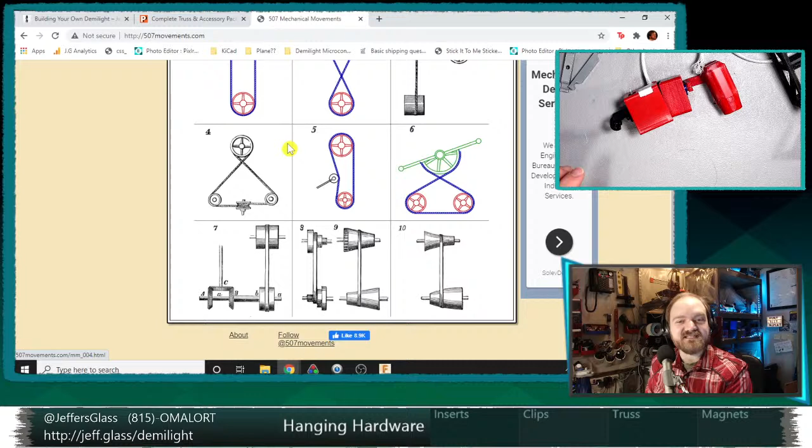Chris says, is it better than the 507? I don't know that it's better. It's dense. So the 507, Mechanical Movements, Mechanisms, and Devices. Let's see if we can get inside that one. That one has a nice sort of web version.

So one thing I do like, let's see if these ones have the same. Yeah, it's very similar in feel to this. This is at 507movements.com. You get things like it starts to spark your imagination. I'm not even sure what you would use this for, but you're translating presumably two non-concentric axes of motion while doing a sort of gear reduction between them. It's like, ooh, that's kind of fun. So fun things if you're like, oh, I need some brain juice, I need to noodle around a little bit.

So yeah, it's not really necessarily informational as a reference. I find it just exciting to be like, oh yeah, okay, linkages with gears on them and an arm and a piston and yeah, it's just a funky thing to do.

Let's get into CAD and start figuring some stuff out. Like I said, I don't know that CAD is going to be the best place to work these things out, but it's at least a place to start.

And I'm not going to take us into the full Demilight model to start with either, just because the timeline is so long and so messy that I think it's going to slow the computer down enough, especially trying to do it on stream, that we'll just start from sort of a scratch plate and see where that takes us. Did we do a night talking about Fusion back in December, I feel like?

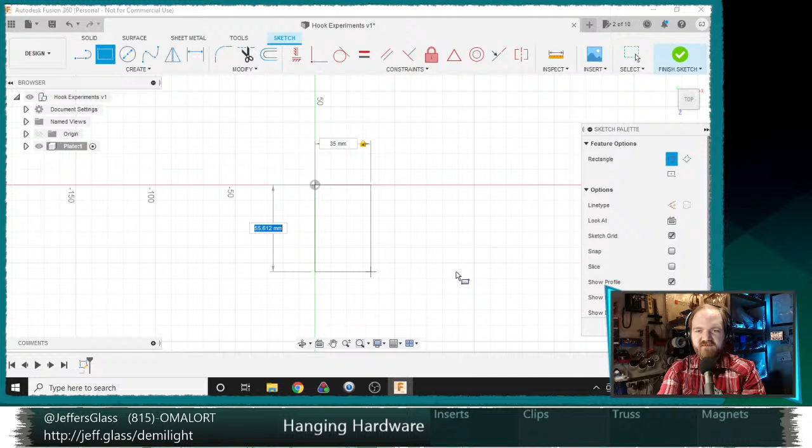Let's say it's 2 millimeters. Like I say, we'll go back and make this precise to the actual model at some point. I just need to get some experiments out, because if we're gonna ultimately learn that they don't work, then why spend a bunch of time on them? So we'll make a new component for our, we'll call this hook 1. That's a name that's not gonna come back and bite me at all.

So here's what I'm imagining. I'm imagining a device shaped like, let's see, how am I going to best demonstrate this? How about a piece of solder? Just need a flexible bit of something to work with here. So why not a piece of lead?

So I'm imagining a hook shape something like this internally, and this, not to scale, represents the outer part of the hook. This is sort of more rectilinear, like that.

So there would be a slot in the base of the light itself through which this arm can go, and it goes down pretty far. This hook part clears the bottom. Then this hook would rotate over to the desired angle, and then it would hook sort of back up into a hole or post or something like that. That would allow it to stay in a given one of 4 orientations.

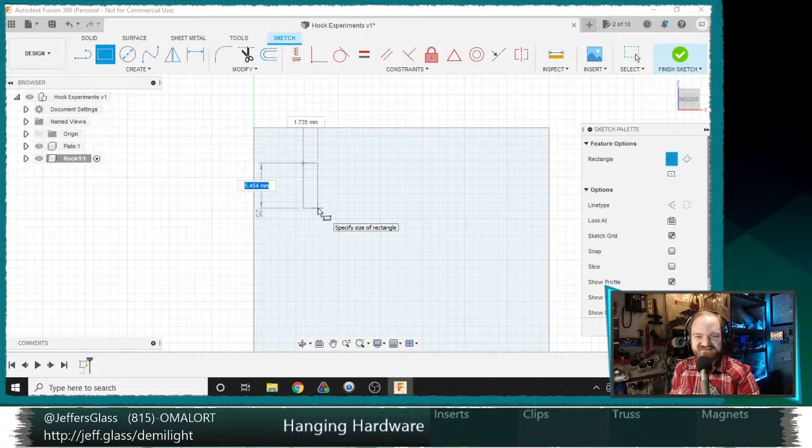So let's start with a sketch on our bottom face here. This may not be to scale ultimately, but let's say that we have a 6 millimeter by 2.4. How wide are these that we have on the table here?

Grab my calipers. So these existing hooks are 10 millimeters across. That feels about right. Could maybe be a little bit smaller. I think for this purpose, it's actually going to need to be a little bit smaller.

So why don't we make these 8 millimeters across by 10 millimeters? Gosh, that's going to be huge. I guess the arm doesn't have to be the same width as the hook itself. That would be quite handy. So let's say that these are in fact 4 millimeters by 8 millimeters.

And if this is not making sense, I apologize. I think it will once I can get it into motion. Oops, where's my sketch? There we go. So we'll draw a line up from here.

And then what I want is a circle through 3 points. And they are this, and let's say that. And there we go. Okay, so this is going to be the first body of our hook arm, as it were.

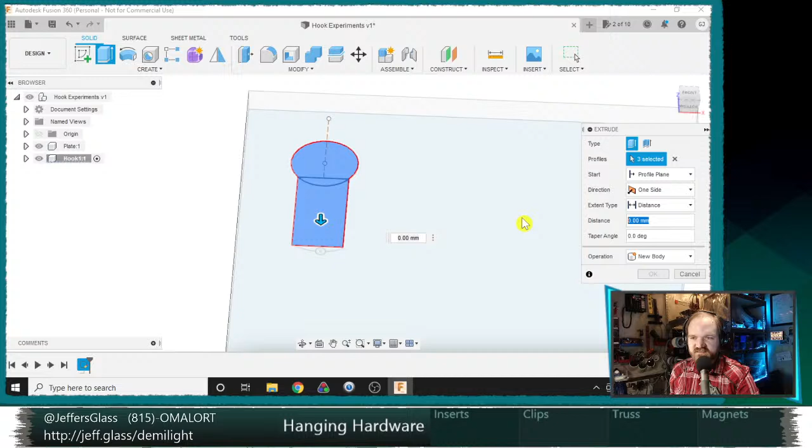Let's say that's 2 millimeters, sort of hanging down inside of the body of the light, as it were.

And you know what I do? I think what I want to do, right off the bat, one is I could move this to some more cromulent position. Ooh, Francesco's sent me a little loading symbol.

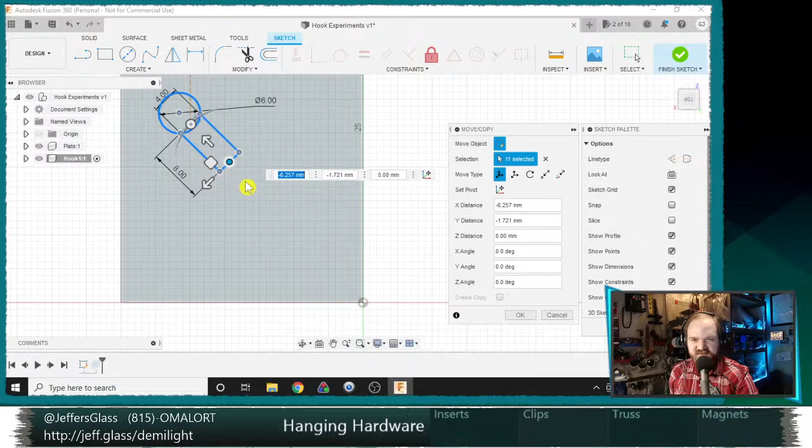Let's see, should probably put this on something like a center line, but just as a sketch of a thing, I think that'll be fine. Okay, so that's fine. That extrudes.

Okay, so then this thing, in my imagination, which is the only place it exists right now, is going to have a little tooth that sits back up into the body of the light.

So we will draw a little line there, and let's say that this is 3 millimeters, and we will extrude it, say 1.2 millimeters up. Okay, so there's that.

I'm not, so ultimately, right now these two bodies are intersecting, right? This arm and this plate, which is representing the bottom of the well—I guess I'm confusing bottom and top quite a bit here, but calling this the bottom surface of the light makes sense to me. So right now these two bodies are intersecting, but I'm actually not going to fix that yet.

We'll come back and fix that a little bit later. We'll just cut away a lot of this bottom at the same time. So now let's make the upper part of the hook.

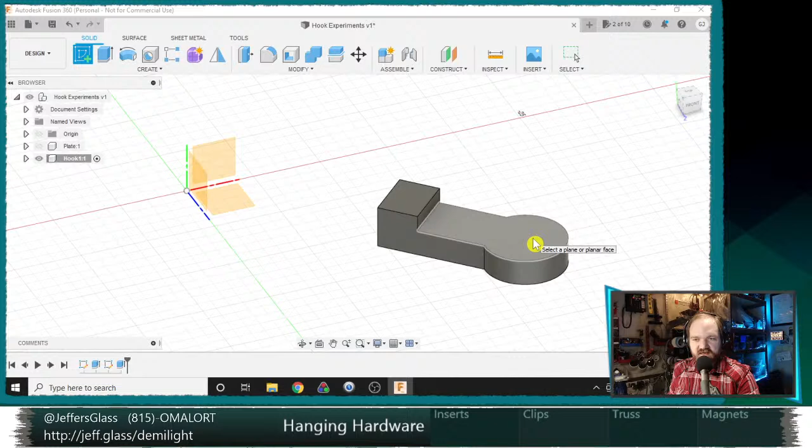And to do that, I am going to take my circle here, make it an actual circle on this layer, and extrude that as a cylinder just a little bit, about 0.4 millimeters above the bottom surface of my Demilight.

We'll say to object. I feel like, and I wouldn't blame anyone, all these words that I'm saying only like 70% make sense when I say them, so forgive me. I'm feeling like, well, what I hope Jeff's talking about makes sense at some point. I hope so too, dear viewer.

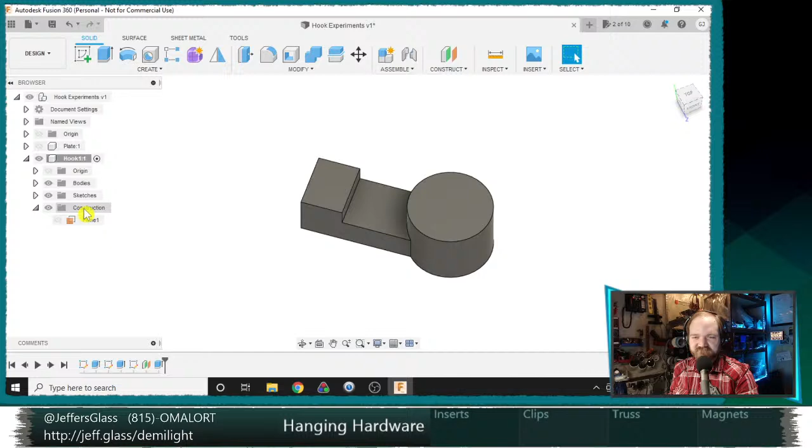So now we would create the actual part of the hook itself. What might be classy is to not make a sketch right on this layer. We'll make an offset plane, say 5 millimeters above it, and start the rectangular portion of the hook there, and then we'll loft between those two shapes. That'll make a nice smooth transition. Won't that be classy?

So here, what we will do is make a sketch line just there, and we will start making the actual sort of arc of our hook. We said our hook was 10 millimeters wide, and that felt about right. So this will be 5 millimeters, and thickness-wise, let's say it's going to be 3 millimeters total.

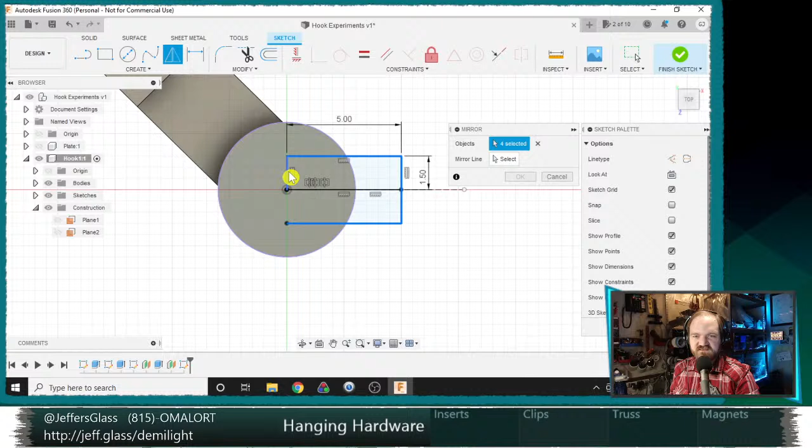And then we'll just take these lines and mirror them. This is one of my favorite techniques when I'm drafting a symmetrical thing, is just to make 1/4 of it, and then mirror it across the relevant dimensions. So we get, oops, not that, I want to use that as my mirror line. So now we have a rectangle that is exactly centered on this circle.

Now let's steal some more dimensions from this, assuming that we're mimicking this existing hook exactly, which, as we talked about earlier, is not necessarily the goal, but as a place to start to work out the attachment mechanism, I think is a decent place to start. So that is about 16 millimeters there. That's been feeling about right.

So what I will do is extrude this 11 millimeters, because we already have our 5 millimeters down here. And then, let's see if I get this right. I want to loft between this profile and that profile. And I should get a nice smoothly varying shape between those two. That's going to become our interface point.

And now we'll make the rest of our hook here. So we'll make a sketch on this side, and we will create a couple of circles in line with our sort of vertical arm of our hook here.

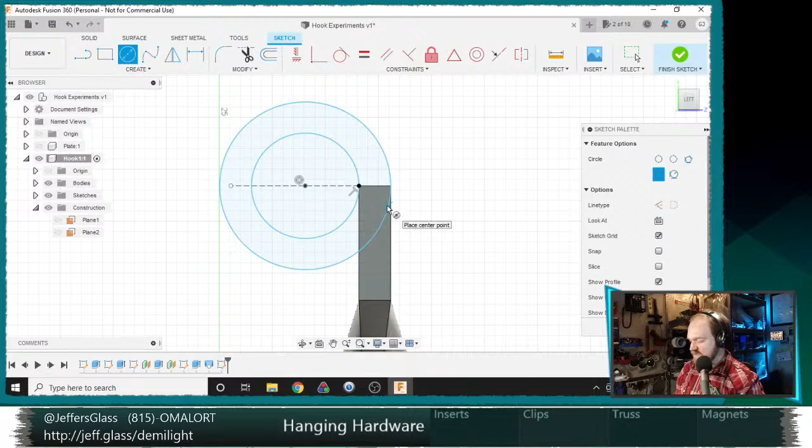Let me steal a couple of quick dimensions for them. I think I made the inner dimension here arbitrarily about 1/4 of an inch, maybe a little bit bigger. 7.8 millimeters there. And I guess what was total thickness on this? About 3 millimeters, okay, that's pretty good. 0.78 millimeters.

So, coming back over here, we will say that if we put a point across here, put a point and a point, and we will say that this is 0.78 millimeters. Oops, not 0.78, 7.8 millimeters is what I should have said. It's a very small bit of truss there.

And then it's just we won't cut it off perfectly horizontal. We'll make this extra line here so we have a little bit of sort of overhang on our hook. And maybe we want to give that a dimension just so it's well defined. Let's say that's 10 degrees. We may want to come back and finish that later.

We'll make an offset plane on the other side of our hook, and then we'll extrude this profile that we made straight across to there. Okay, so there's the basis of what I'm proposing for our new hook.

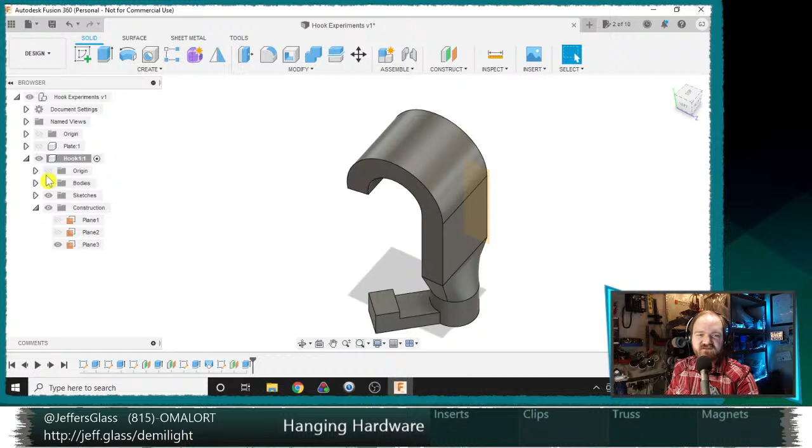Now let's deal with how it would actually interface with the base of the thing, right? Because right now these two things are sitting inside of each other, so to speak, because there's no interface between them.

So first things first, let's just do a basic cut. We'll use the combine operation on the body. We'll use our hook as our tool body, and we'll do a cut, and we'll keep the tool so we don't delete our hook after this operation. Let's see here, did that take? If I turn this off, yes. So now we have a hole and a notch, so to speak, in our base here.

And now I wonder if I could turn this into 4 notches. There's a couple ways to do this, but I'm going to take the lazy way out, just like before. I spend a lot of my time making 2 sets of axes and mirroring across one axis, then the other, to get 4 radially symmetrical points. I guess I could do a rotational pattern instead, which would be slightly faster in Fusion, but this workflow is very familiar to me by now.

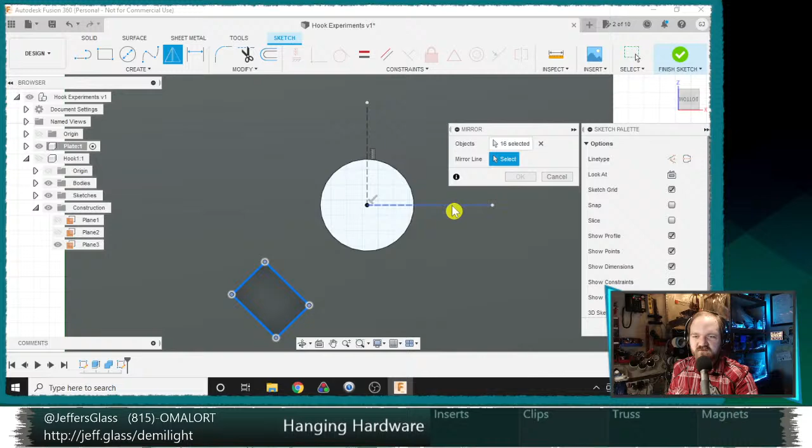So I select those 2 notches, mirror them across. These 2 notches, mirror them across, and now I want to make these other 3 notches the same depth as this first notch.

Let's see, is that the right place? No, that's on the surface here. We'll turn our sketches off for a second. I want to make a notch as deep as this hole here, although it's not letting me get into that hole. Maybe the sketches are... there we go. I want to make a plane coplanar with the inner point of this notch, and then cut the other 3 notches to that plane.

And hopefully... ooh, well, that's not right. We'll try it again. Take those 3 profiles, we'll do an extrude cut to the distance of that plane. Yeah, okay, so now I have my 4 registration points there.

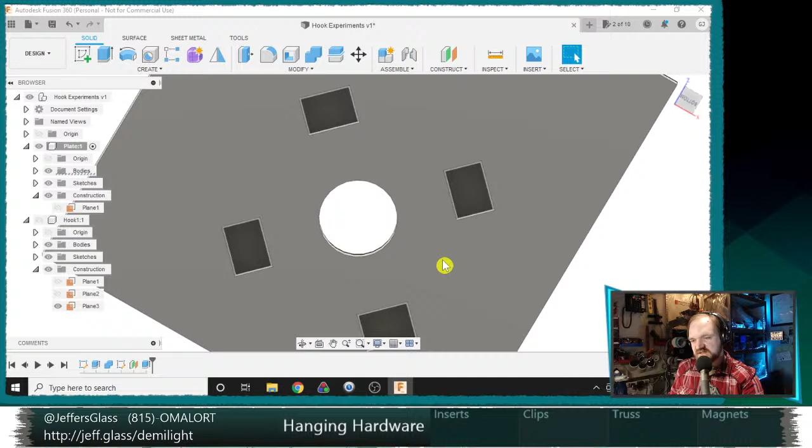Why cut to the plane, not just to the face? At least in previous versions of Fusion, maybe this is no longer true. Let's find out. Deselect that object, can I just cut to... oh, you totally can. So in previous versions of Fusion, there were times it wouldn't recognize how deep you were meaning to cut, because it's a little ambiguous.

If this was, for example, a non-planar surface, you could still specify cutting to that position. But if the surface itself doesn't extend as far over as you'd want to go, you get this error like 'could not create tool bodies'. It's like it doesn't know if your position is meant to be coplanar with this point or that point, or that curve, or if you're supposed to extrapolate the curve. I guess at least in the current version of Fusion, you can just use a face as the cut surface. I guess it's now an out-of-date habit to create a zero offset plane there, but that's good to know.

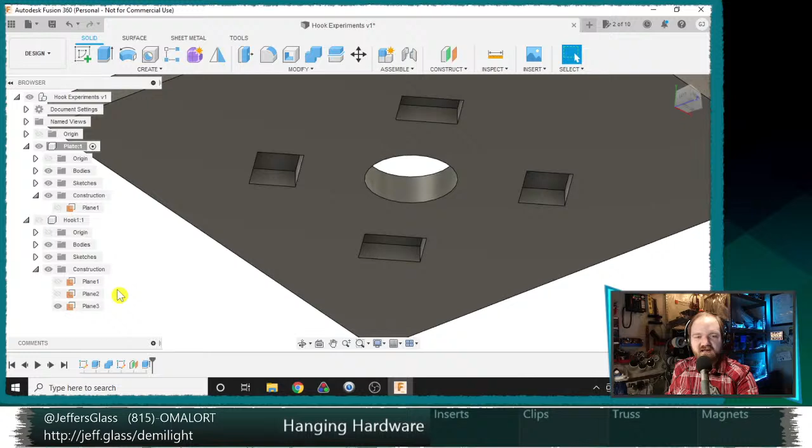So the last step here, turn our hook back on, is we'll need a way to get this hook down into this base. So I am going to create one more sketch on the base of my plate, and project the profile of my arm here, and then take those various parts, not this corner and not that corner, and make a copy of them, but rotated.

Let's see, ooh, is it not going to let me move-copy a projected point? Ah, that's a bummer. We may have to go over them, which is a bit silly, but we'll do a 3-point rectangle tool, which is a great way to get rectangles on non-perpendicular axes. And we'll take our circle and the relevant lines of our rectangle and rotate them by, say, 45 degrees.

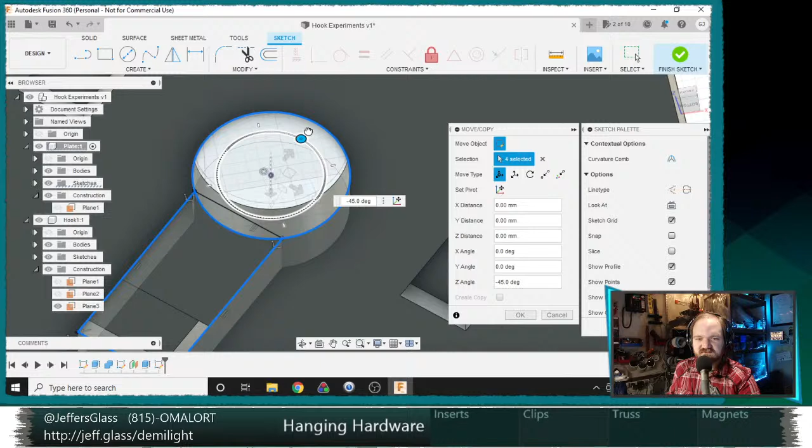Will you let me do that? You let me do that? Not so much, huh? Maybe it's because they have constraints, constrained to be immediately on top of the shapes they're based on. That would make some sense. Let's see here, yeah, I think that is what's happening. So maybe this isn't quite the best way to do this.

We'll project that shape in, copy and rotate. So let's see here. Copy, take that point out. Oops, take that point out. Copy. What I don't think it's letting me do, Chris, and I might just... oops... is... oh, it is letting me move them now. That's a good sign. Let's see here. Ah yes, because I just copy-pasted it, it didn't bring the constraints along with it. That's quite clever.

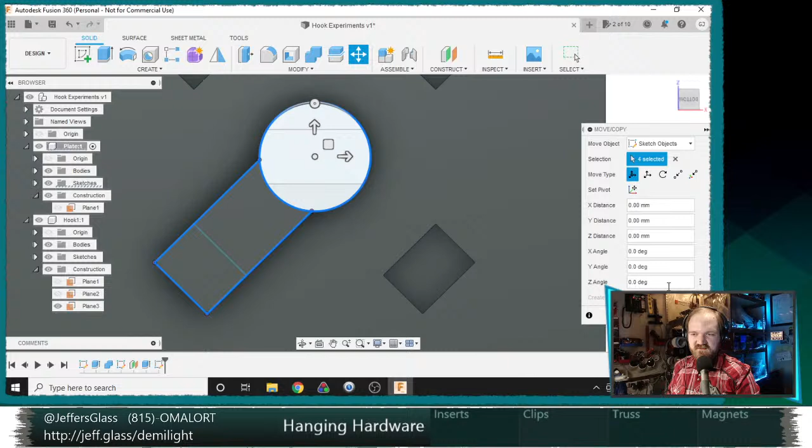Let's see, is that just the circle again? I want sketch objects - I want this circle, that line, and that line, and I want them to rotate. There we go, yes excellent. Thanks, Chris, saving my bacon tonight. Now we'll finish that, and we will extrude.

I think I need one more line to this sketch. Why is this not a region? Maybe we will draw from the circle to that point. Oh, maybe we are seeing some other body. Yes, the hook is getting in our way, so get rid of that hook. And now we should be able to extrude, cut, to object, all the way to the top, cut, and there we go.

So now, all of you who've been waiting patiently for me to figure out what's going on - there's one more thing I have to do, which is adjust some dimensions on this hook. Specifically this construction plane needs to be as tall as that lower notch is, plus a little bit. Let's do 1.6.

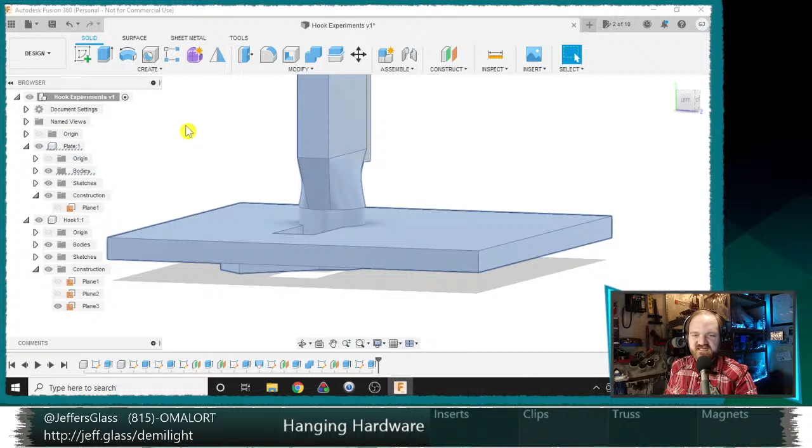Okay, we got there through a bunch of rambling. So here's the gist of this idea: you take this hook part, you rotate it 45 degrees to where it is now. It goes down through this keyhole slot underneath. It rotates around to one of these four positions, and then it pulls back up slightly into one of those four slots. There it is sort of not anchored, but its orientation is captive in that position, right? So it would lock itself to one of those 45-degree positions.

Now, obviously, there's no clearances built into this yet, which would be the next thing to solve, but I think this has some merit. Let us do a thing I often do in these situations just to see if it's worth trying.

I'm just going to open Prusa Slicer and see how long it would take to print something like this, to see if we can run off a test copy tonight while we work on other things, and then come back to it - maybe working on other ideas for the same project.

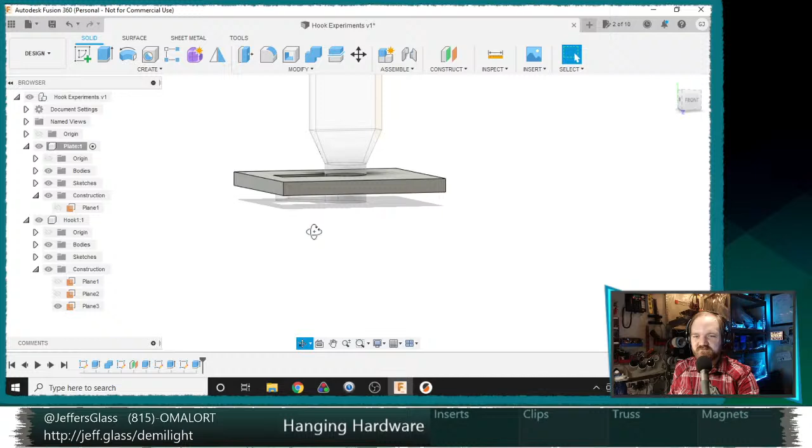And just because I'm feeling lazy, rather than going back and editing the original size, I'm just going to manually cut away the extraneous parts here. So we are left just with the active bit. So let's export these as STLs, and as Chris is rightfully saying, I have to come back to do clearances before it prints. But this is something I do.

I'll just be like, hey, if I wanted to throw one of these on, it's a 12-minute print - well, I'll just get it going while I work on more things. Save this in my moving lights folder.

You don't send it directly to the Prusa printer? No, I like to have a separate copy of all of the STLs that I print, as well as all of the exported G code I save for every print that I do.

So this is plate 1. And I will confess, I rarely need that, but there are times when knowing that I have the exact STL, or especially the G code, that I printed on a specific date and time can be really helpful when I'm going back and trying to iterate on it. So no, I don't send it just directly over to the printer in that way.

So let's bring our hook and plate in here. And now I guess another problem is thinking about print orientation for these. Let's flip this guy on its side. That's not awful. With supports, that would print just fine.

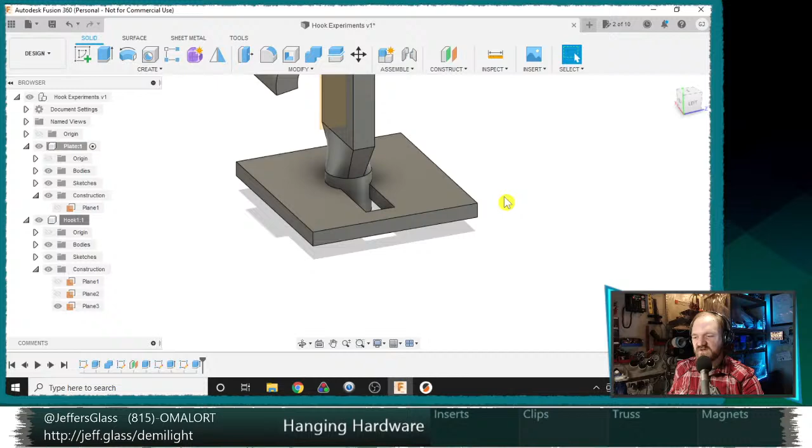So let's go back in - Chris had 35 minutes. Chris, you were so close. We'll go back in and clean up some of these clearances, and then we'll get this thing printing out.

So let's see here - we did, let's go back into our sketch where we made our notches, and rather than just having them be exactly the size of the tab on our hook, we'll make them just a little bit larger. I'm gonna guess we need 0.4 millimeters of clearance overall, so I'm gonna add 0.2 millimeters on all sides. It's a little bit of a guess.

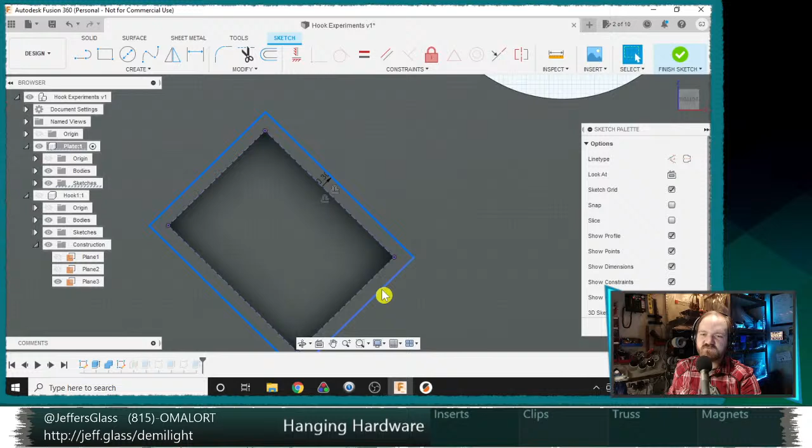In fact, maybe for testing purposes, let's go a little overboard. Let's give ourselves 0.6 millimeters to play with. It'll probably mean a little bit of shakiness in this arrangement, but that's for the sake of validating this slot idea, rather than not being able to get the thing in and not being able to validate anything.

I think having it go in and being a little sloppy is probably preferred in this case, versus not being able to get it in the hole and not knowing if the idea works. We'll mirror that across.

All right, we'll finish that. This is one thing we talked about with doing Fusion work: rather than going from the end of my timeline and making changes, I'm going back to the earlier steps in my timeline and making the modifications I should have made at that point.

Similarly here for this keyhole, I am going to apply some tolerance to both the hole itself and to my slot, and then make sure we cut both of those out.

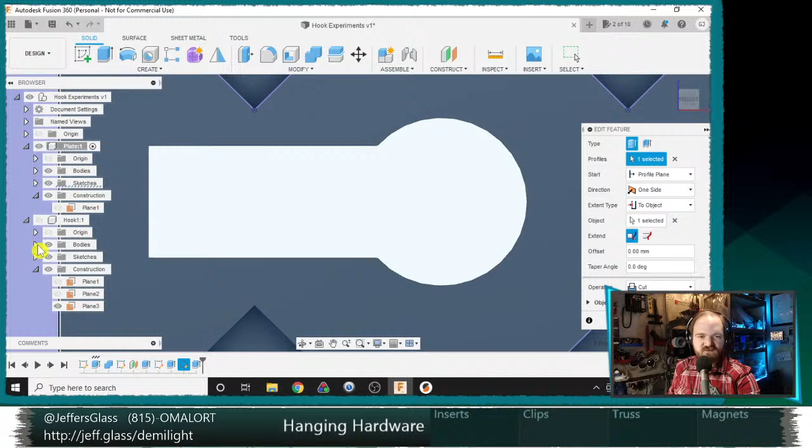Now where is the sketch I actually want to cut? That's not the right one. It's this one, yes. So we'll include this additional area here so we have a nice bit of clearance.

It says I missed the bottom left one. Thank you, Chris, let me go back and get that — the bottom left notch, I'm thinking you mean. That would be this. Yes, excellent, thank you.

All right, so that's some clearance on the hole and the keyhole there, and I think those are the only places we need clearance, because that's the only places they interact.

So, another neat feature — I guess I've never played with how this interacts with the send-straight-to-3D-printing utility method in Fusion Works.

I'm just going to re-export my plate object here as an STL, and it says it already exists — do you want to replace it? Yes, I do, please. I'll do the same for my hook, saving it under the same name.

Then in Prusa Slicer I can come in and say reload from disk, and it will open the newer version in the slicer. If you send it again, I wonder — yeah, all right, well that's good to know, Chris. That's how it should work for sure.

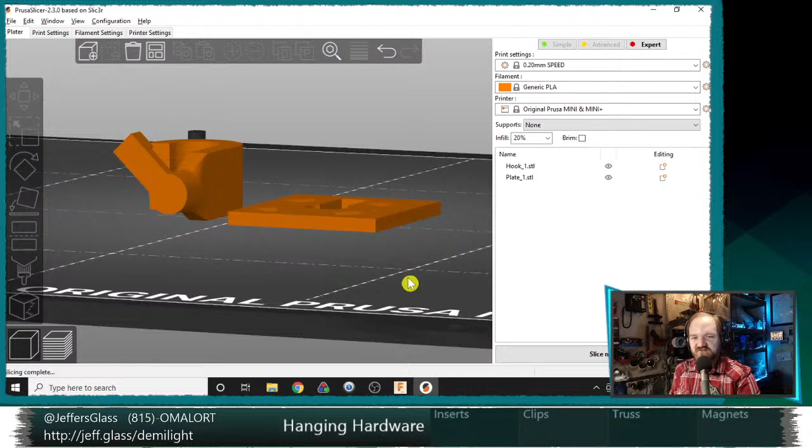I guess we'll want to make sure we've enabled supports — generate supports, please. All right, now let's slice. Slice now: 22 minutes with supports on. That seems reasonable. Well, let's give it a shot.

So I'm going to export this G-code. Like I say, I save all of the G-code for all of my prints, so I can sometimes go back and check what settings or temperatures I printed something on. I don't have to do that often, but when I need to, it's very handy.

So we're gonna find out. I suspect y'all won't be able to hear me super well while I'm monkeying around with the printer here, but hang on for a moment — enjoy some cool jams, and questions if you got them.

Oh, I never said tonight — my beverage of choice is a Sierra Nevada Wild Little Thing, a slightly sour ale. Now, I am not a sour ale guy, but this one is only slightly sour, and I find it quite good. The other advantage of the in-my-face microphone is I don't have to mute myself to drink — I can just slide away from it. Very convenient. I guess I could smack my lips on the mic too, that would be nice.

We'll see if I have enough headset cord length to do everything I need to do up here. I think I will.

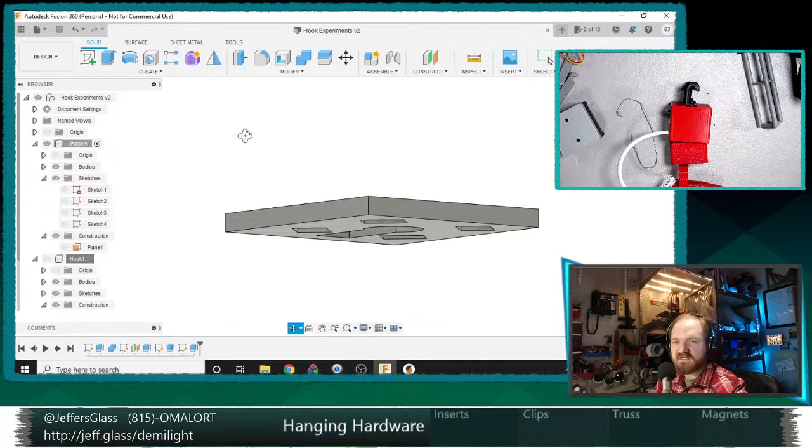So that's exciting, that's one draft, going to the printer now. That's great progress for, I don't know, 20 minutes of drafting tops. That's the idea that's been kicking around my head for a while, and I had to get it out so we can play with it and see why it's not good.

So thinking about the other piece of inspiration for connectors this week, for how to connect two bodies together, is... where is it? It's just here. Hang on.

No camera on the printer. Yeah, I certainly could, Chris. Actually, if you looked really closely behind me, you could maybe tell. That screen just there is one of the additions to the workshop this week, showing the Prusa Connect interface, the little web interface served by the printer itself. We're going to have to use the computer to do it, but if we had a second computer, or that Raspberry Pi setup from the Raspberry Pi Nights, we could just keep track of the print time on that.

It's .0.119, I think it is. Yeah, so if we send it to its IP address, we just get that same little local interface here, and it should give us estimated print time. So we can actually just check back in with this every once in a while if we feel like it. And like I say, that's what I have on the TV behind me there.

Sidebar about this TV: this was a free TV, got it from the neighborhood, like don't throw anything away, we'll give it to a good home organization, which is great. Have it hooked up to a little Raspberry Pi. It's fine, it's a 1366 by 768 native resolution TV. It's fairly old, it's cool. It has HDMI, VGA, composite, component, and a tuner input, like an RF input for an antenna, so there's a lot of fun playing around with it there. 1366 by 768 is not super kind to Raspberry Pis, this is not the first time I've run into that. Currently, though the Pi is happy to put out data over its HDMI port, the TV, no matter what setting I'm putting it, is interpreting it as a 640 by 480 data stream and then upscaling it. So it's very low resolution. I'm sure you can't tell over stream and the internet and everything, but that is very, very strange.

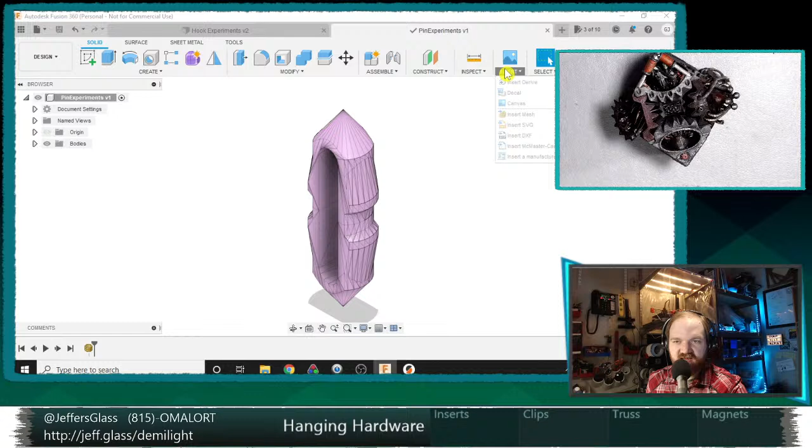They're coming in as meshes, but that'll be fine if we're just taking measurements off them, just to kind of examine how this person did this design, and how much lip is there on one of these holes versus how much spacing is in here. Because to be perfectly honest, if I was going to start something like this, the first thing I would do is just rip off this design wholesale and copy these dimensions over, because I think they have some possibility.

Now, here's an interesting thought. Could we combine these two ideas? This peg design is meant so the pieces can rotate 360 degrees within a circular shell, or in some cases they're locked into exactly one orientation. As we saw, if the hole is the same shape as the pin, then the pin itself is not going to rotate.

In these corner pieces, that's actually what keeps the center sections static in relation to the core, while this top piece rotates around them using that pin as an axis. But that center piece down there, that little ball, is not actually moving. It's the same on all four of these - this little mechanism in here isn't actually moving relative to the center. This is just rotating around it.

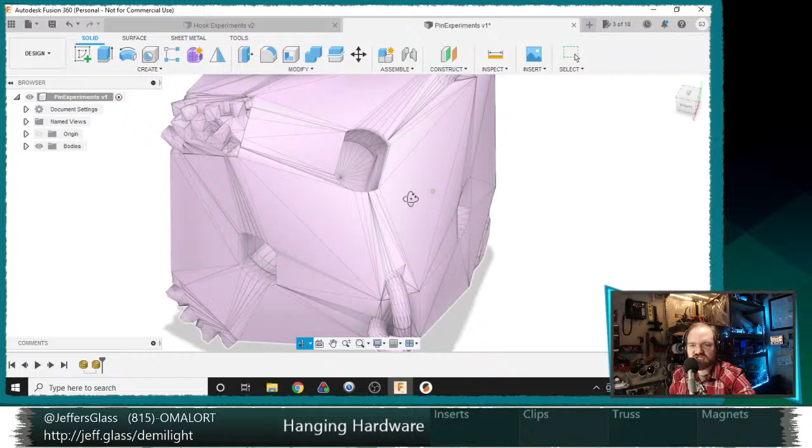I guess the other thing we could do is, rather than having this be a circular hole, it could be, if we go back to the computer, let's say two holes this shape at 90-degree angles. So you could put your pin in this orientation, or 90 degrees to it. If we imagine this is sort of a cross-shaped hole, it could go in that orientation, but it couldn't slide between the two without pulling the pin out and putting it back in.

That's kind of interesting. That sort of minimizes the clunkiness of the hook itself, which I rather like. Yeah, that's kind of interesting.

Let's see if we can get this idea tested out. One thing I'm going to do is steal this exact pin design, and by tomorrow I'll have the link to this actual project in the video description, just because I'm going to rip it off, and it's really quite a cool solution to this problem.

So to do that, let's get back into CAD here. I guess before I do, just a real quick note for those who have been here before.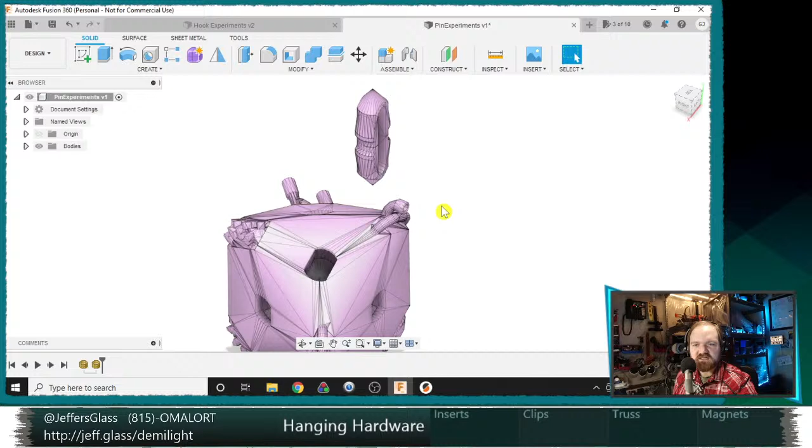All right, so let's get in here. Maybe we can just turn this part into a hook.

Let's do this properly, let's get rid of those. We'll do this inside of components. We'll call this our hook. Need some servos and face tracking.

Chris, if there's one thing I'm learning from this week, it's that I definitely don't have enough projects. So I think I'll get right on that.

So here is our pin as a mesh. Let's see here, I'd like to construct a plane through two edges. I might need to take this mesh and turn it into a different kind of surface here.

If I can remember, here we go - surface. Let's see. Rigid joints, contact sets, modify, construct, plane through two edges. Will you let me do this in mesh space? Maybe not.

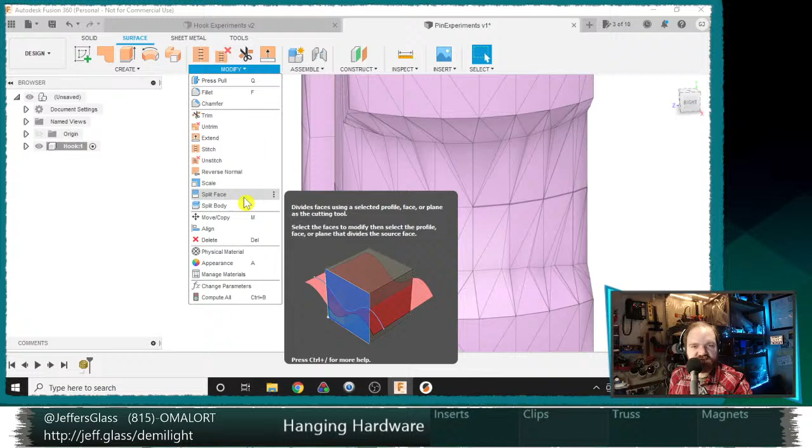Let's see, untrim, unsplit, split body - yeah, it's not going to let me work with this. I have to convert this to a different kind of mesh, and to be perfectly candid, I don't remember where that tool exists now. Let's see here, it used to be... oh, maybe it's here now.

Bodies, mesh body, create components from bodies? That's not quite what I want. Used to be a convert to object or something like that. Where did that exist?

Press, pull, assemble, motion link, no. Let's see here, what am I thinking of? Is it under tools? 3D print, make, utilities, inspect, select is what I get. Component color cycling toggle - well, that's exciting. It used to be in what was called the patch workspace, but the patch workspace is like 3 versions gone.

Let's see here, mesh to B-rep - yes, Thomas, that's what I'm thinking of. Where is mesh to B-rep now? Enable our mesh workspace preview in preferences to try a new mesh editing workspace. Oh yes, you have to disable the timeline - that's right, this does ring a bell.

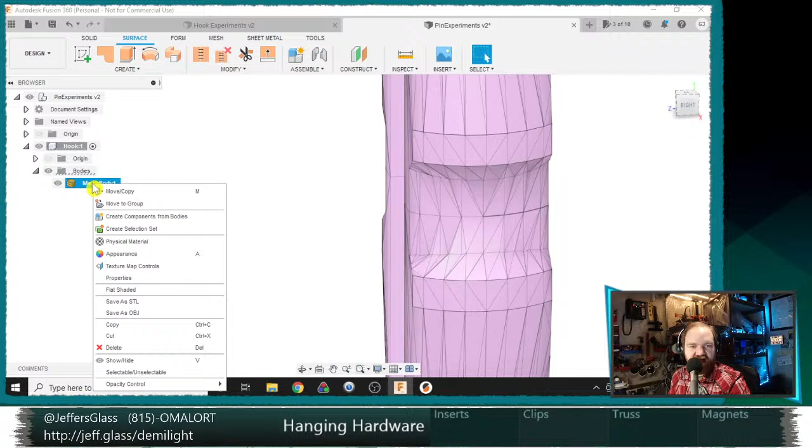Let's see here, convert, yes - convert quad mesh to T-splines, B-rep to T-splines to B-rep. No, that's not quite it. Mesh to B-rep - Thomas, my hero. There we go. All right, so now let's re-enable our timeline.

I guess I might be a little bit screwed. I'll do the plate that will mount this in as a separate assembly, so we don't get screwed by having to disable the timeline again. Let's see, so now we'll go into pin experiments, capture design history. There we go, yeah, there we go.

So now hopefully I can do plane through 2 edges and cut this thing in half. Yes - go back into our solids workspace, split body, that body with this tool, split. All right, so now, yeah, there we go. And now I've got half a pin to play with.

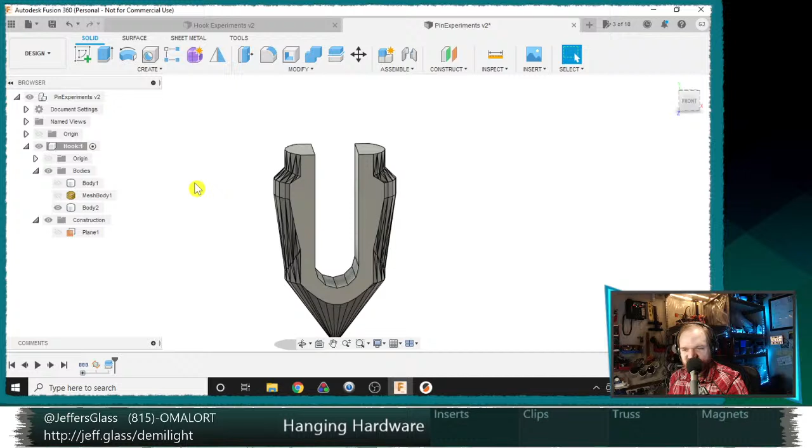I guess one thing we'll learn is if this is the appropriate amount of clearance here to fit snugly inside of our hole. But I think there's no real way to know without trying, so let's just make our hook.

So we'll make a new sketch on this face. We'll make a rectangle here - that's going to sort of be the plate that interfaces with the bottom of our Demilight. And then we shall, let's, find our midpoint here.

How do I do this? I guess I will. You know what, I'm not even going to be that fancy about it. I'm just going to mirror this across our center line and call it a day. Mirror. There we go.

Finish. I should probably think about printability here. So probably this hook only wants to be as wide as the actual pin itself, right? So we'll make this collinear to that. Oops, if it'll let me.

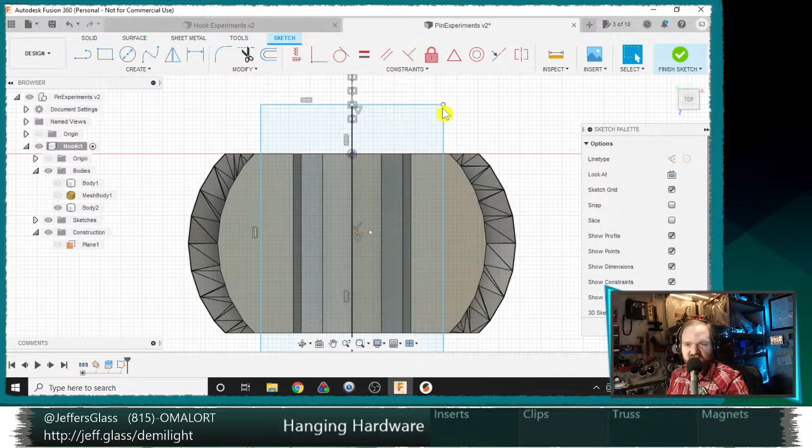Maybe coincident will be happier. Coincident to that? No, not happy about that at all. Maybe, here, let's try projecting both of our faces. And then let's try collinear again. Collinear. Oops, failed to solve.

How strange. It's not quite happy playing nicely with this B-rep here. But that'll be okay. I think we just need to get within 0.1 millimeters for our slicer to be happy, and I'm just going to do it by hand. Because like I said, this is just an experiment for experiment's sake.

So now let's see, how wide is this turning out to be currently? This is... almost exactly 10 millimeters, which is what our original hooks were, that's kind of handy. So now we'll extrude our various surfaces upward by our 16 millimeter height.

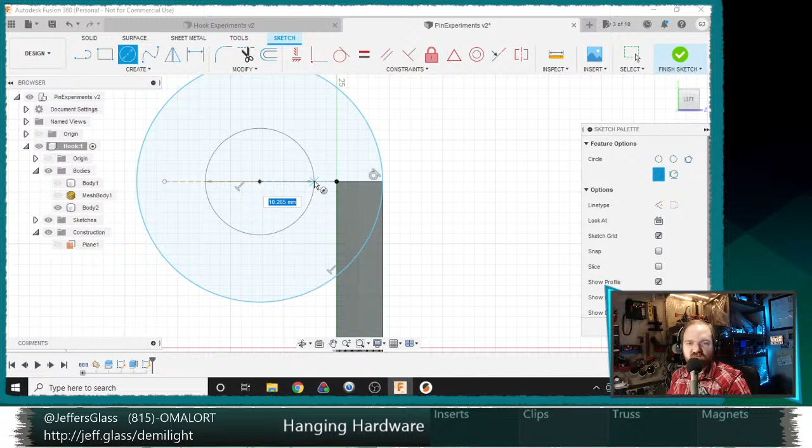Not that the hook is necessarily the perfect shape. In fact, there's good reason to think that it's not. But just for the sake of consistent testing for now, it seems fine to replicate that same hook shape with all of our pin experiments. So let's see here.

I need a point on this side, and we said this distance was what? That distance was rough. Turn the calipers on - they work better that way. 7.8 millimeters. All right, so 7.8.

Oops, that is 7.8. No, not 7.8, Fusion? Not at all 7.8? It doesn't want me to change this dimension. There we go. Something seems off here. Something seems... not. What's feeling strange? Maybe, maybe not. 7.8 on the inner dimension. Yeah, that seems right. Okay.

Well, that's fine, I guess the hook itself is thicker in cross section. Oops. And I was going to, much like our other one, we will have a slight overhang here at a 10-degree angle. And then we will extrude, join. Okay, so there is our pin hook, which is kind of interesting.

Now, I wonder with this one - I'm actually going to take away that overhang, because I think without it, this is quite printable, and with that overhang, it's not going to be as much without supports. We'll just do one of those for now. So that's our potential hook.

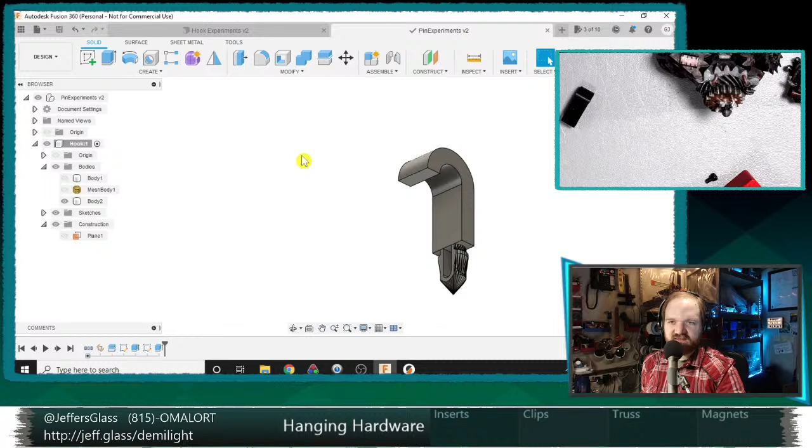So let's work on the hole that would go along with this guy. We'll do it as a new assembly, since thanks to Thomas.

Oh, what does Thomas say? Thomas says, really wish you didn't have to turn off design to convert like that, but at least it works and Fusion has gotten better. Yeah, it's true. Like, I remember back in the early days of Fusion, the STL import function was basically unusable. And now it seems like, other than me not remembering how it works, it seems to work okay.

Ooh, Cookie says, here's a good aside. Cookie says, I just realized you can use existing hardware to make a raised center pipe. Check Twitter for the pic.

Ooh, I like this. All right, well let me, on yet another monitor here, I'm just going to whip up Twitter. And, ooh, check this out, y'all.

Yeah, so this is Cookie's par pipe adapter, right? Something like that. If you print the par standard STL, you can use 2 grapples to get an internal pipe like Tyler Truss. Yeah, so if you were doing like either a moving light tucked up inside the truss here, or like sticking the par 64s inside the truss or what have you, that's a really cool repurpose of that existing design.

It looks like Cookie - and you tell me if I'm wrong - there's a wing nut in the back, so it actually is through-bolted and secure in this position. That's super cool. Yeah, if y'all haven't checked it out, like I said, the link is down in the description. Check out this truss set that Cookie has put together. It's pretty neat, pretty nifty.

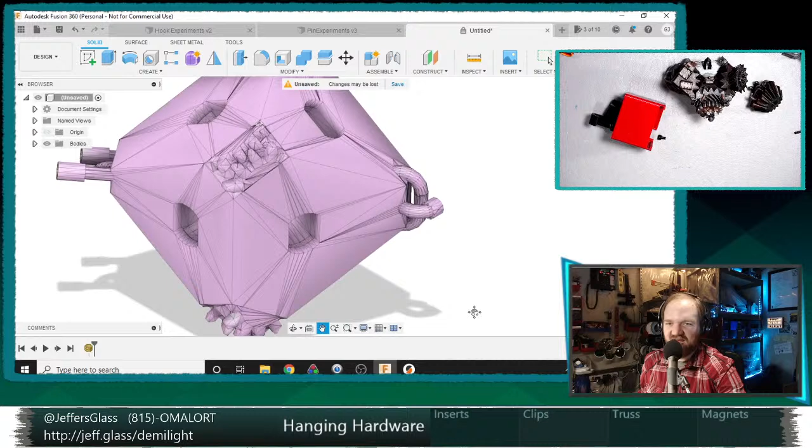All right, more things to think about. Let's get our pinhole, as it were, sussed, and then we'll go from there.

So I think this is a shape I'm just gonna try to recreate, although I think maybe the shape is more complicated — it's not just a hole, well, maybe it is, with filled sides here.

Just thinking about what's gonna be the most expeditious way to take two of these holes and combine them with each other.

But I think first things first, let's go into our surface workspace here — yeah, I can't even split that right now. So let's do our mesh to B-rep trick again, and we'll save this real quick.

We will turn off the timeline. Can I do it right from the right-click menu? No, of course not. Modify, mesh to B-rep, new body. Cookie says yeah, they're expensive M4 wing nuts from China. Yeah, fair enough.

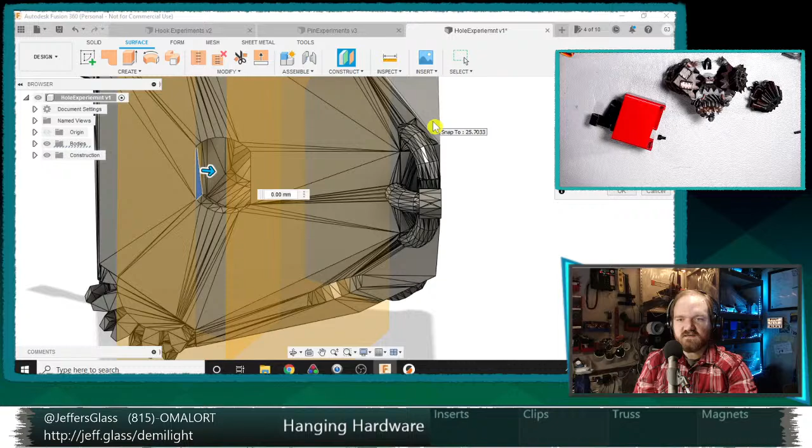All right, so let's do an offset plane. Let's see, how about -5 millimeters that way, and we'll do -5 millimeters the other way. Seems a little far, but we'll be a little generous there.

And we will split this body using one, two tools. Oh, something bleeped and blooped at me. Oh, but now it seems to be happy. I always get a little nervous when things bleep and bloop, but I think we're doing okay. All right, so body number 3 here is the one we're working with.

Actually, this might be a useful way to get inside this thing and figure out its dimensions, because it would sure be nice to just replicate this shape. What I'm worried about is that it's not purely a cylindrical profile with a diamond at the bottom — I think there is some contouring to the innards of this shape.

Here, you know what, let's take this back. Let's not just cut this hole out — let's instead just split it in half and have a look at its guts. So we'll take that triangle, make a mid-plane, and use that to split our body in half. Split along that plane. Oops.

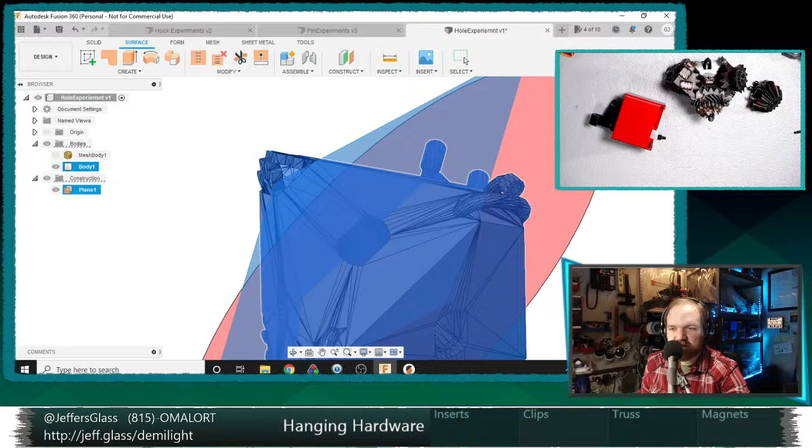Oh, no intersection between target and split tool. That doesn't seem right. Split body, this body, using this tool. Split — no intersection between target and split tool? I don't believe you. What? How can that be? Hello? Well, let's try one more time, because sometimes doing things three identical times the same way sometimes has different results. No intersection between target and split.

How strange. Let's try, just in case there's something weird going on with it lying exactly on a vertex — let's put an offset plane 0.01 millimeters off from our exact midplane and see if that will split. Split using this. Yes, it will. So I think what was happening is the midplane of those two faces we were using was exactly on the intersection between two planar faces, and it was saying, well, I'm not intersecting this face, and I'm not intersecting this face, so I'm not actually intersecting the shape. That is a flaw, I would say, but here we are.

All right, so let's make a sketch here and just have a look at the contour of this hole that someone else designed, because I'm gonna steal it.

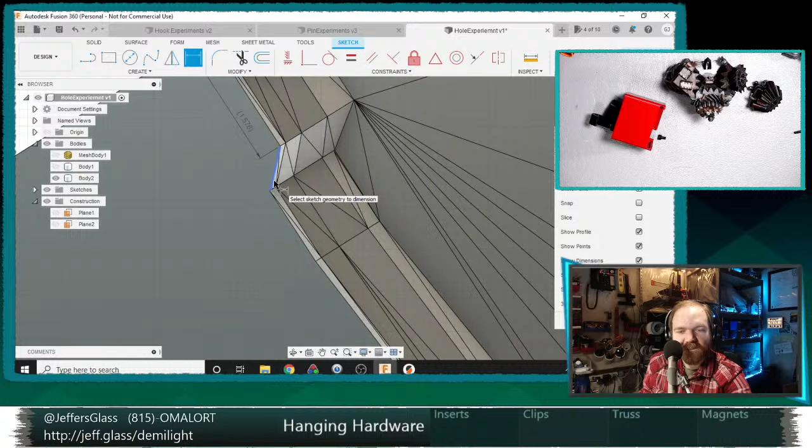So let's take some... I guess the thing to do would be to project this layer and let's do the wick trick, and we'll copy and paste some sketch objects over into a new object.

Here's the thing I don't know: can you copy and paste sketch objects like lines and points between sketches? That would be awfully handy. I just don't know if you can.

Let's find out. Let us select some sketch objects here, we'll copy them, finish sketch. We'll create a new component, call it new plate. And here we'll turn off the old one and the old sketch, and start a new sketch on this plane.

Can I paste? Ooh, it thinks I can. Yes, I can. So there is the profile of our hole. That's going to be great.

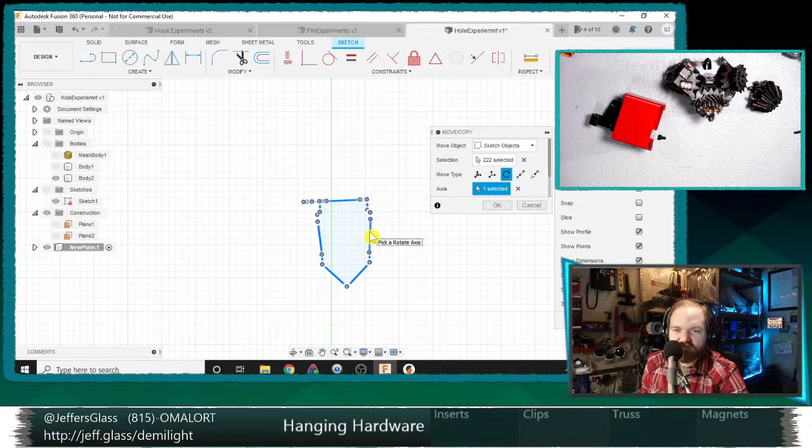Now it's not in the most convenient orientation, but that's okay, we can work on that. I guess it doesn't actually necessarily need to even be in the perfect orientation for us to manipulate it here. So let's do this.

We'll do a move copy, and we'll do a Z angle rotate. Probably the right thing to do here is... well, 2.5 is actually looking pretty good. It's like lock, dimension all of this out so that the relationships between these lines and points to each other is constant, and then just set, for example, this top line to a purely horizontal position.

That would be the right way to do this. The quick and dirty way was just to mess around with the dimensions until this top line looked roughly horizontal, and then we'll just base everything off of that.

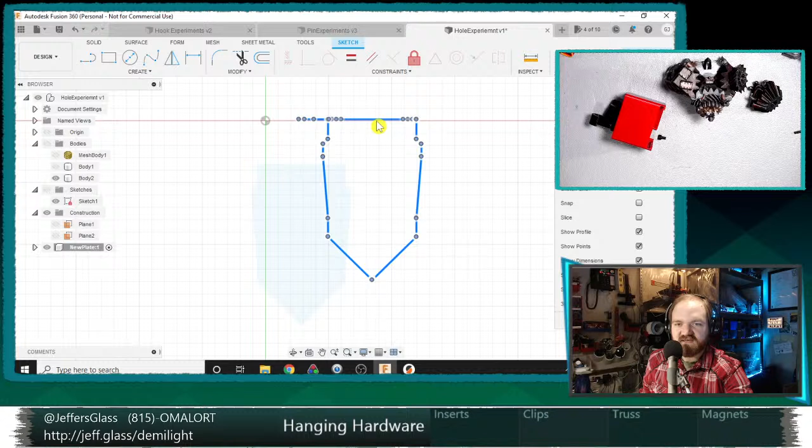So now we just have to turn this thing into a solid we can play with. Let's see here. Let us start by creating a box of sorts to surround this object, just so we have some negative space to fill.

I'll make this rectangle collinear with this. Oops. Yeah, see, okay, so that's what I was worried about, is now it's getting all kinds of funky because these lines are not really locked in place with relation to each other. But I think we'll get by.

All right, so now if I take this shape, for example, and revolve it around this axis, I may want to split this in half first, yeah. So, oh, my timeline is still disabled. Oof. All right, well, no time like the present, let's re-enable that timeline.

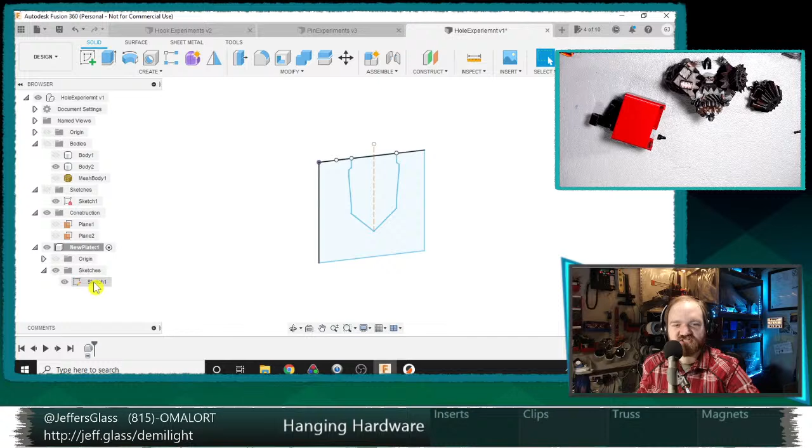And we'll edit our sketch. Edit our sketch. Edit our sketch. Ugh, killing me, Smalls. I should have re-enabled history as soon as I did the conversion to B-rep, but c'est la vie.

So what I'm going to do is basically project everything from this. I guess I don't have to project everything, I can just project, say, a singular point, and then we'll come down like that and finish. Why? Oh, right, because...

Can I not project all these objects at once? Be a real shame. It's interesting it won't let me, and maybe it was because I wasn't capturing history yet. Can I not edit a sketch that I created before I was capturing timeline history? That sucks. That is a real shame.

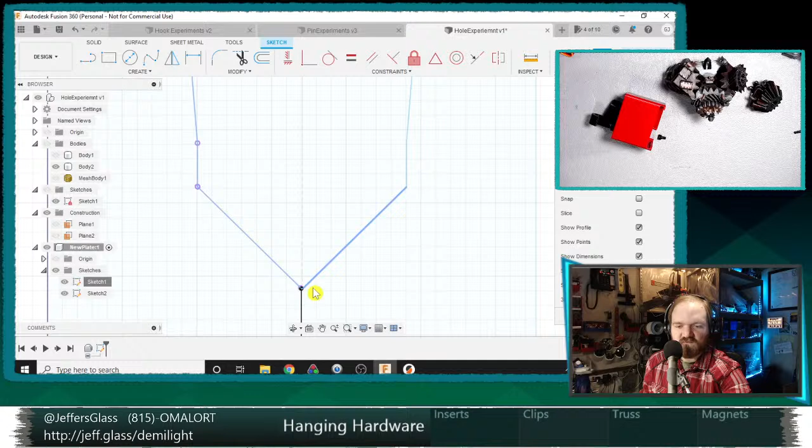But lesson learned. Let us just bring all the relevant parts of that sketch into our new sketch that does exist on the timeline, and we will continue our center axis up here so that we have something.

So this is something that happens sometimes with revolves, right? I want to revolve really just one half of this shape. Let's say I'm missing one bottom line here. I don't want to revolve the whole profile 360 degrees because I would end up with the shape sort of doubled, as it were. Revolve. This is not a closed shape either.

What's happening here? I'm missing some lines. Yes, here we go. Oof, I'm really paying the price for not re-enabling history when I should have.

Do I have two separate zones now? It looks like I do sometimes. Yes, because I have both my sketches on. I'll turn that sketch off, and I should have... oh, unless I have it just in this sketch. Oh, this is killing me.

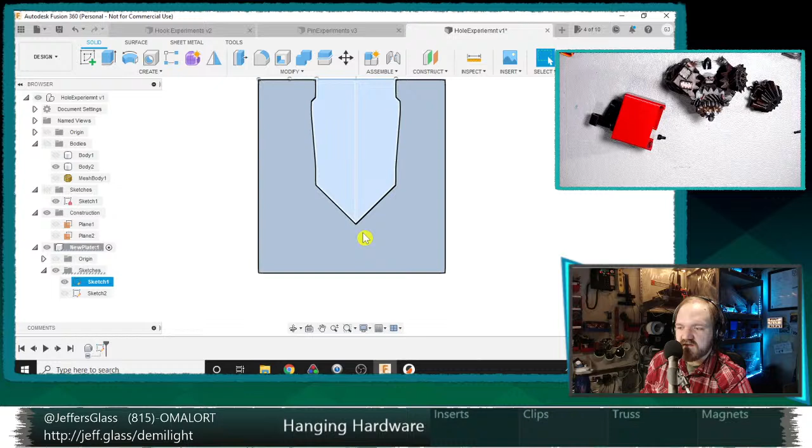So what's happening here is if I could go back into this first sketch and draw just a single line just here, I'd be golden, right? But I can't. You can only, if memory serves, take a create action on a set of sketch features that are in a singular sketch. So I can't say extrude this from this line from sketch 1 and this line from sketch 2.

I actually need them to be part of the same sketch, and so now I'm sort of having to recreate sketch 1. Yeah, here's another unfilled hole in my sketch profile here. Let's see. Do. Just gonna go.

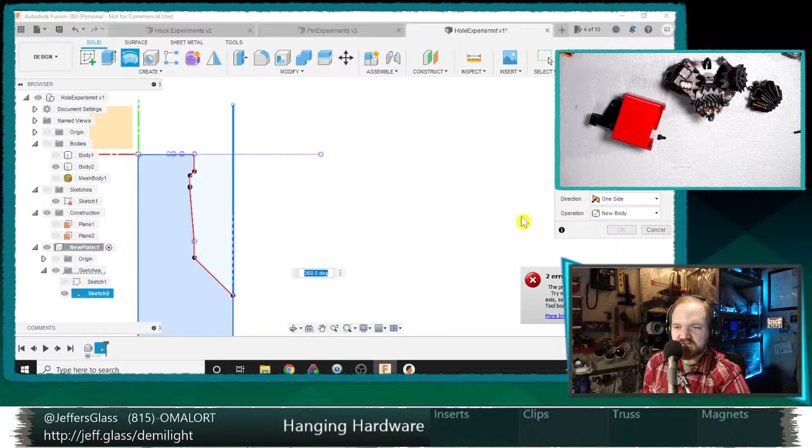Thomas says: last night I was looking at data sheets, tonight I'm soldering, tomorrow night I'll be smelling burnt semiconductors. Yeah, that's the circle of life, I think.

All right, so here's our hole, as it were. So what I'm proposing to do is, with tolerance, basically make this a cruciform hole so that... Where's my pin? Here we go. Let's take the dimensions of our pin here, which are 4.4 millimeters. Dimensions of this hole are 5 millimeters or so. So let's turn that into some things. We'll come back over to the computer, and let's take our center point right at the bottom of our hole there and give ourselves some construction lines to work off of.

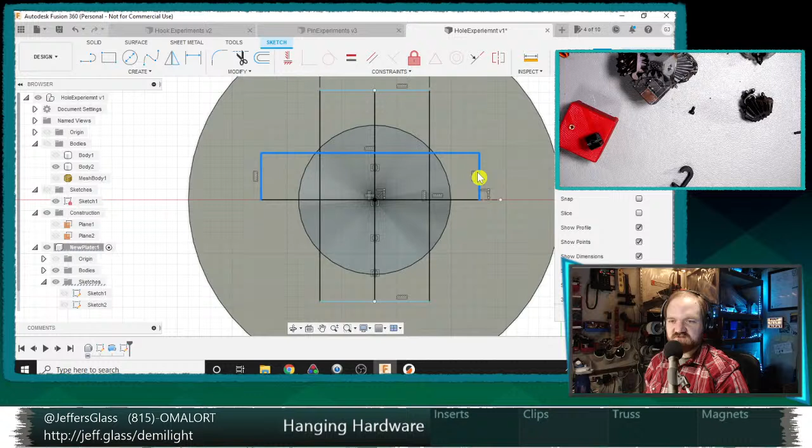And then let's see here, let's think this through. So these we will mirror across this center line. Yes, and we want the total width of this to be 5 millimeters. Yes, and then same thing here. We'll take that, we will... And the mirror tool for sure is not the only way to do this. You could do this with 2 rectangles and an equals constraint. Mirroring is just sort of the way I am used to thinking about it. And we want the dimension across here to be 5 millimeters.

Here, I think we have found the flaw in my plan. Dang. Okay, so here's what's happening: I was proposing that we would essentially have 2 holes that looked very much like this at right angles to each other, so you could only put it in this orientation or this orientation, which means your hook could be this way or this way or this way or this way, right? 1, 2, 3, 4. What it looks like, though, is that because of the dimensions of this hole, and really because this arc is more than 90 degrees of arc it's turning out, which I don't know that I believe, but maybe it's the rounding of these corners that's hiding that. If we were to try and square off the corners so you could only put it in those 2 positions, you don't end up squaring it off at all. Like, if we look, this here, if you follow my mouse, this here is the sort of north-south hole, and this here would be the east-west hole, and they actually overlap just slightly in this corner. They just, like, there's not actually any space in the corners here to fill in between them. Which is a bummer. That was gonna be such a clever idea. Beans.

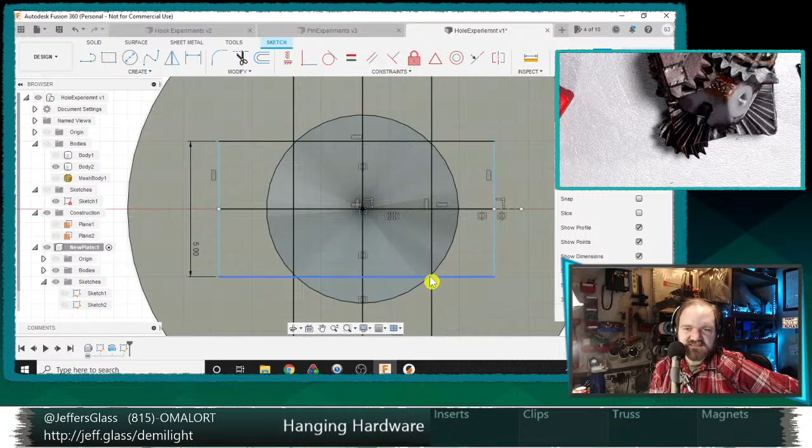Well, all right, so here's what I think. I think we've spent lots of time on this construction here, doing a thing and then undoing a thing. So here's what I'm gonna do: I think we're gonna print this block to play with, and print the hook that goes with it. And while we're printing them, we'll play with the prints that we did earlier from that other idea, and then we can come back to this. So let us print some things.

So we will save this. This will be, we'll call this pin plate. And we'll go back to our pin and hook design, which looks a little goofy, but I think this idea has some possibilities. And this will be our pin hook. And we will bring back into our slicer and import those two models. It looks like our pin plate didn't come in. Pin plate.

Oh, it helps if I export the correct body, I suppose. There we go, save as STL. This is our pin plate. All right, we'll bring that into our slicer. Pin plate.

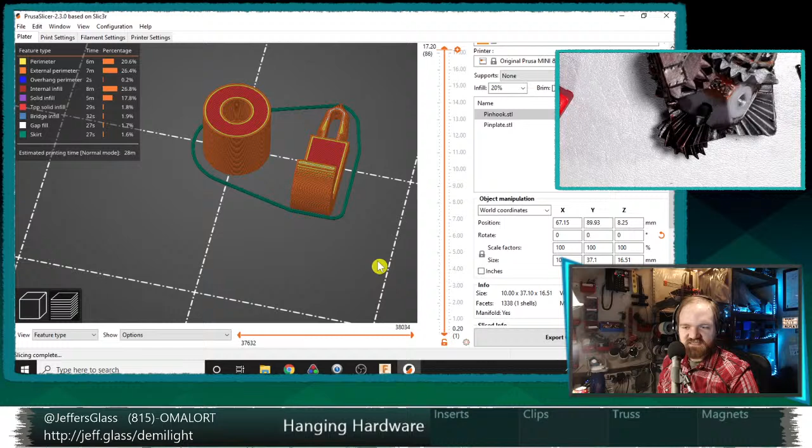All right, so let's rotate that. We said this was going to print 180 degrees of rotation away from this, so we'll go all the way upside down and bring that over. Let's turn off supports because I don't want any spurious supports showing up, especially in the middle of that plate. So this is going to be a 28-minute plate. That feels about right.

Probably I should be printing this at a slightly higher quality, like a lower layer height, but for the sake of an experiment, we'll call this pin hook. That's fine, save. All right, now I'm going to pop up. We'll get the print and the flash drive off of the plate, and we'll start the next print. As I understand, you can't hear me when I'm away, so good time to ask questions.

Got this print here. I think, who was it? Oh, Chris Gammell, who some of you might know. He does the Amp Hour podcast and runs an embedded electronics consulting company called Contextual Electronics. He's also a Chicagoan, and recently got himself a Prusa Mini as well.

With the way he phrased it, which I really quite liked, having a printer that you don't have to think about really does free you up to think about 3D design, right? You sort of eliminate the tinkering with a printer as a hobby. I mean, we're never really done tinkering with printers, but it allows you to really just say, okay, if I can draft it, then I know I can make it, in a way that's even more true with a really functional printer than just any printer.

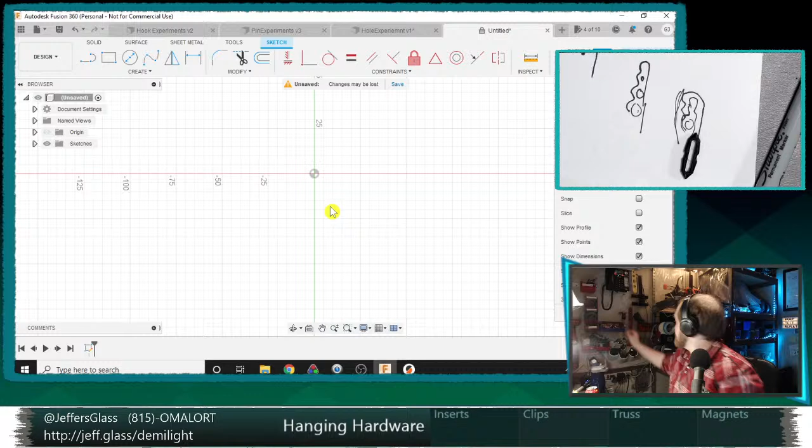I'm going to grab my calipers here and take a quick measure, a field measurement, of what the D3D Truss printed out as - 6 millimeters across there. So let's say that this is a 6 millimeter piece of pipe.

Let's say the tolerancing here is going to be the thing that would need iteration, right? It's like, what is the actual tolerance in all this? But just for the sake of this evening, let's say that it's 0.2 millimeters all the way around. Yeah, Cookie, if you have the actual as-designed dimensions - I'm getting just over 6 millimeters as printed on the members of the truss here.

Let's see, and then let us - here, we'll just strike a line, we'll make it vertical, and we'll make it tangent to this circle. We'll make this... bring this all the way down, and let's offset this by... let's make this a 3 millimeter clip.

Is that going to be too stiff? Another important question - how stiff is too stiff? But looking at it by eye, that's going to be quite a stiff thing. So let's make this like 1.6, minus 1.6, so it goes the other way.

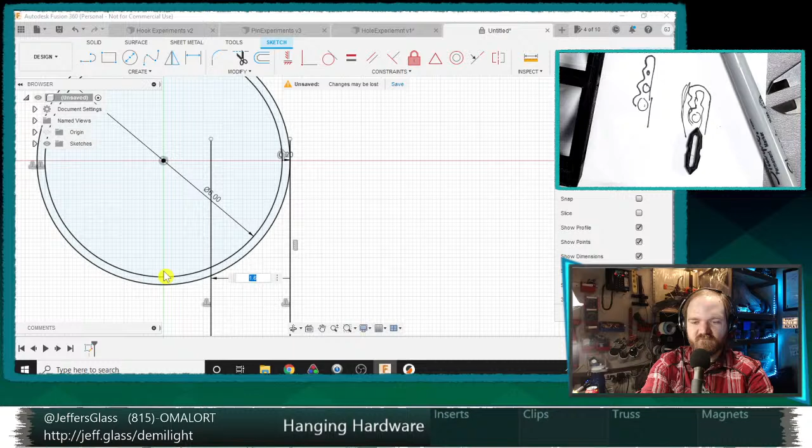There we go, and we will make this coincident to our circle so it lines up right there. We'll make a new circle that is the width of the thing - chord is 6 millimeters. 37-degree extra hook, says Cookie on the snap fit, and chord is 6 millimeters. Well, that's a good sign.

So let's see here. What I think we're gonna do is bring a line across, and we'll eyeball a fit point spline to be the other part of our hook. Let's give this a dimension just so it has something to work off of.

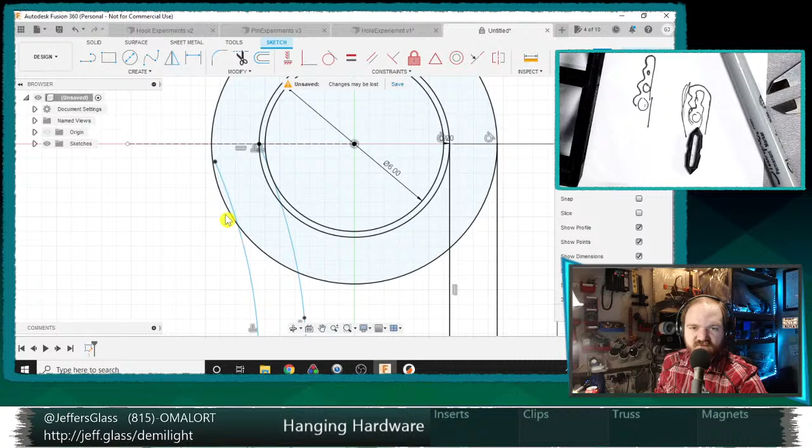Let's make that 1 inch. It's a little silly big. Let's make that 20 millimeters. And let's give this an offset by... can I not reference my offset dimension? That's unfortunate. How about 1.6? There we go. Yes, it's doing a linear offset, but that'll be fine for our purposes.

And we'll just cap this off with a circle here. This is not my best drafting ever, not my most robust drafting for sure, but for the sake of experimentation and getting it out quickly, stealing more excellent ideas from everyone here tonight, which I very much appreciate, this will do well enough. All right, so here's roughly the idea, right?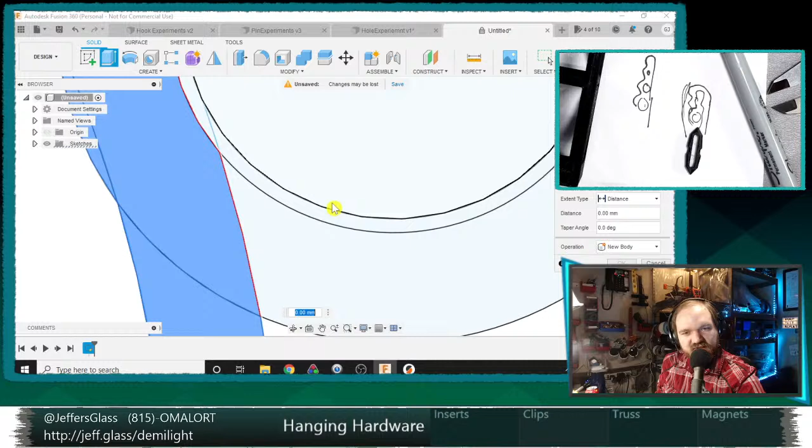We'll extrude this just so we're clear on what we're working with. So this innermost circle is the dimension of the pipe itself. Then there's a little bit of tolerance for the 3D printing process.

And then, so I think I need to put my spline here in a slightly different place, because I don't want to go inside of the tolerance of the circle. I want to go outside of it. So let's move that just there.

And let's adjust our offset down here to be just slightly smaller. All right, finish sketch. Let's double check our extrudes so that we're making a clip and not an awful thing. Yes, all right. So I need a little divider here to make this into 2 separate shapes. And we'll clean up our extrude sections and take that out.

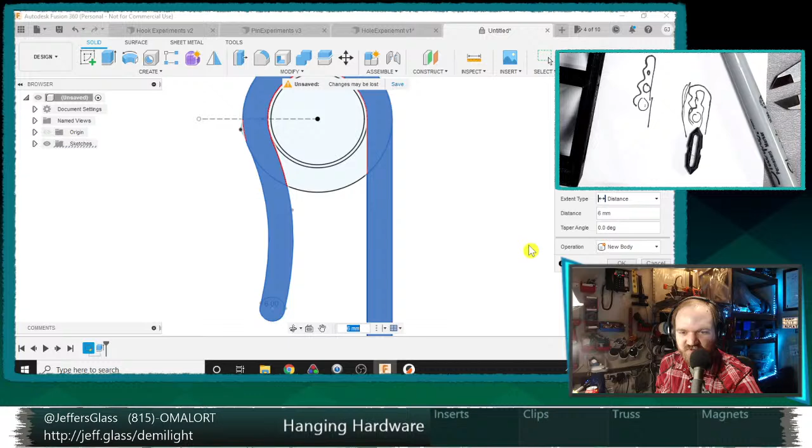So here is our hooky thing. Something like this that just clips over the pipe in a way. Yeah, something like that. I think that's the gist of it. I wonder.

All right, so we will save this as clip clamp. We got 4 minutes until our other print finishes, so I feel pretty good about this. We will export this as an STL. We'll call this clip clamp. We will bring that into our slicer, import, clip clamp. We'll spin it into place.

There we go. Slice. This is a 7-minute print. Oh, I was about to say we were probably not going to get to this one tonight, but I think I might have another 7 minutes in me after that print finishes.

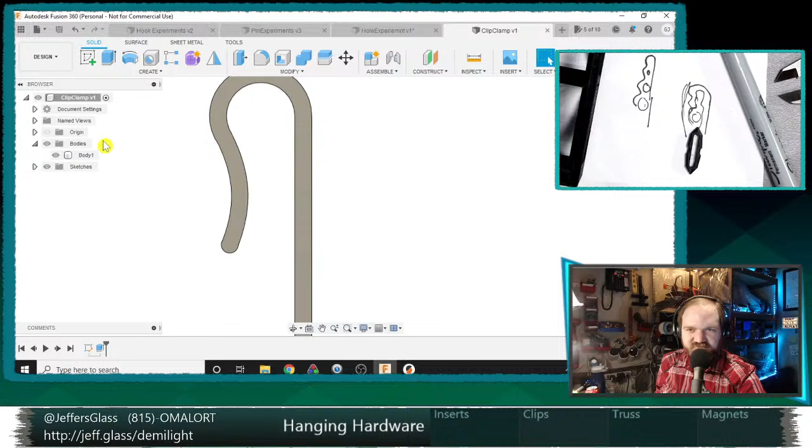In fact, why don't we do another revision of this? So let's make a new sketch on our origin layer here. We'll project this whole body.

And we will copy paste. Oop, the whole body, please. Copy paste. Oops. It's not letting me copy projected lines. It's this same issue again.

All I want is to project. Got 3 minutes till the print finishes. If I can't get it by then, we'll wave off on my futile attempts to make a revision. You know what I really should do is parameterize that first sketch in some appropriate way, and then record the parameters, and then change them.

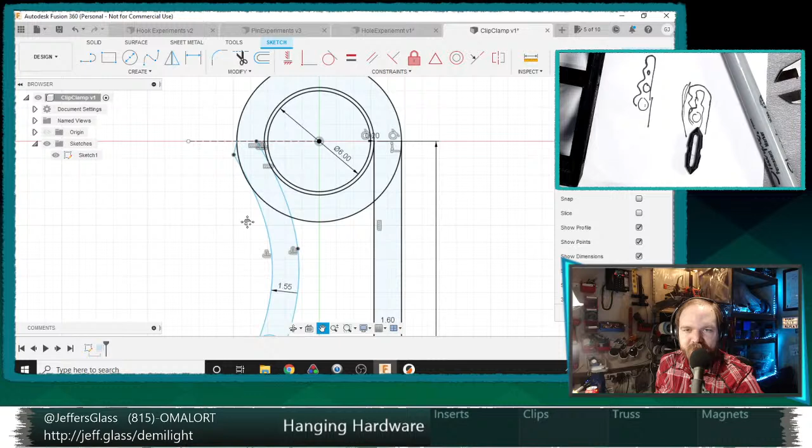So here, let us see what this angle is. 50. Let's make it a nice even 60 degrees, and that'll be good. So before we go on, we'll make a 60-degree body. We'll save that out to an STL. Yes, and we'll bring it back and reload from disk in the slicer.

Okay, and now we have a 60-degree option. Let's do a 50-degree option. Let's do it really tight, and then we'll have to manually adjust that line, of course. So not a particularly well parameterized solution, but again, for the sake of experimentation.

Did I make these coincident by accident? I did, which I don't want. So I'm going to get rid of that coincident constraint there, so we can bring this back over. Yes, there we go. Finish sketch.

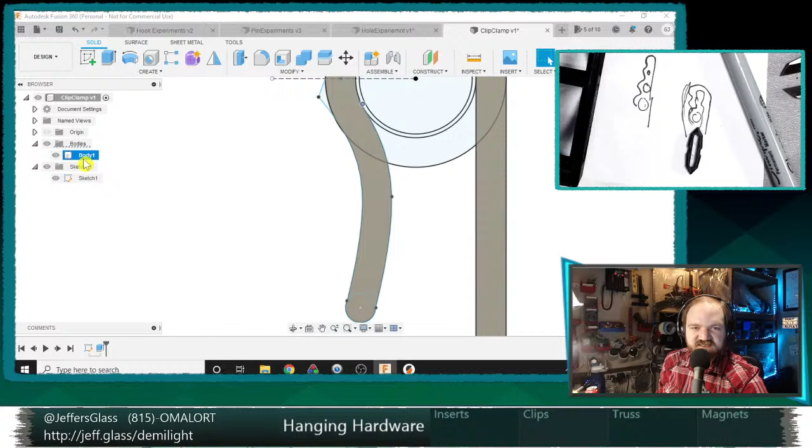All right, so that's an even tighter squeeze, as it were. And we'll save this as clip clamp 50. Bring that into our slicer as well.

All right, we are almost done with the pin clamps. Let's see here, what's our status on those? Ooh, I think I hear it finishing. It really is quite quiet, except when it does big moves, like it just finishes a print. Thomas can't hear it. Well, that's a good sign. All right, so...

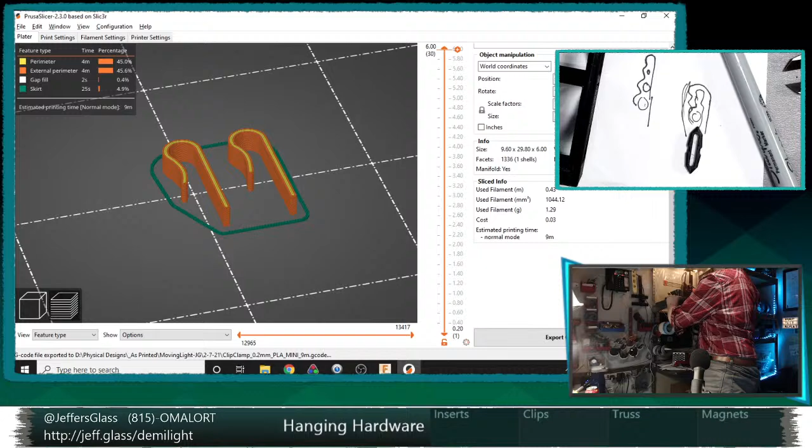The Prusa Slicer and the Mini think that's going to take 8 minutes and 42 seconds to print, which I feel pretty good about. Probably a good chunk of that is the bed leveling. So we have 9 minutes to play with our pin solution here before that one's done.

This will be good, we'll play with this a little bit, see what we learn. We'll play with that briefly, see what we learn, and then we'll call it a night. I think that feels good.

So here's the test, does this work? Ooh, it's real tight, something's gone wrong. I wonder... you know what we should try? Let's take one of these pins. Yeah, uh-huh, so that clicked in fine, and it spins and everything.

But you know what I didn't account for? Part of the flexibility of this pin is due to the fact that it has... not enough flex. This has the entire length of this to flex. By chopping this pin in half, we've really limited the amount of flex that it has.

So really, if we wanted to do this, instead of what I should have done, what I will do next is, instead of cutting this pin in half and welding a hook on top of it, I should have taken the entirety of the pin, and my structure should have started here instead of this cone. Well, we have 8 minutes.

Should we see if we can get that change in? Let's come back to our pin experiments. Let's see here, let's just roll back to the point in the timeline where we cut this in half.

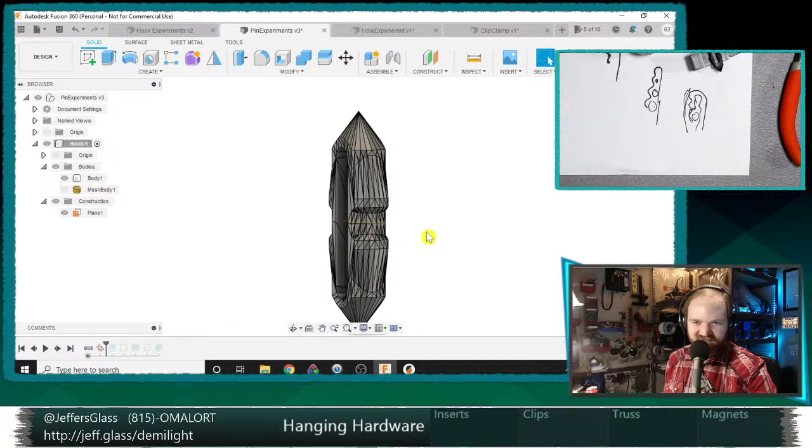Oh, everything's gone yellow. For some reason my Flux, my screen correction app, just kicked in all of a sudden there, even though I have it set to disable until dawn.

Well, that's frustrating. So you know what I'm going to do is take my cutting plane here, and instead of putting it between those two lines, I'm just going to move it up and put it between these two lines up here. Yeah, and then hopefully when we cut...

Yeah, that looks better. Now this sketch plane, let's see if that's in the right place. Let's turn our sketch back on. That's now up here, although this has shifted way off to the side. That's no good, so let's go in and edit that sketch real quick. We'll just drag this across, casually, as we did before.

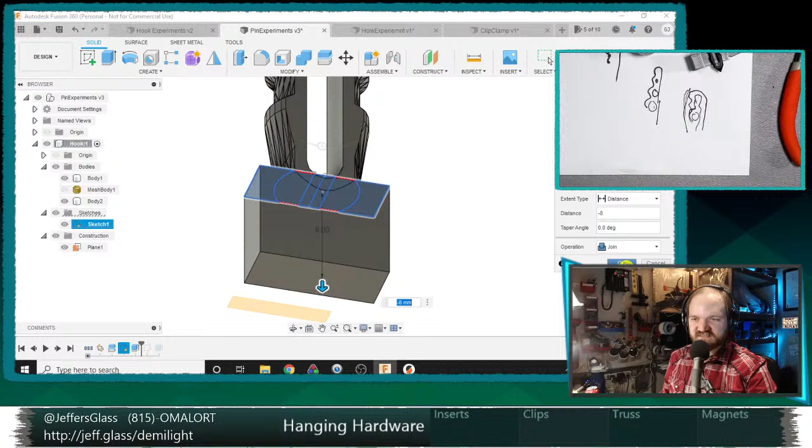Good, and our first extrusion is where? Is the wrong way. So let's say this is... I can go back and figure out what the actual appropriate dimensions here are at some other point. We'll say -8, turn our body back on, and our hook. So our hook looks something more like that.

Now, does this part of the hook really need to be tapered and chamfered like this? I don't know.

Ooh, you know what I actually do want? I don't want... when you put these pins in the existing part... oh no, that's actually okay. I was gonna say there was a little bit of in and out wiggle, but that's actually not true. That pin and that pointy end really does sit right down in the mount there, so that's not really an issue. I was thinking about whether we want a little additional lip just here, but I don't think that's necessary.

All right. Well, rather than trying to integrate the squeezy clip into this, given that we only have 6 minutes left until that's done, maybe we could put the squeezy clip in.

I think we would just print this, and we may not even get to that tonight, to be totally honest. But that would be all right.

5 minutes now before that finishes printing, I'm trying to think if there's any other Demilight updates that are pending, but I don't think so.

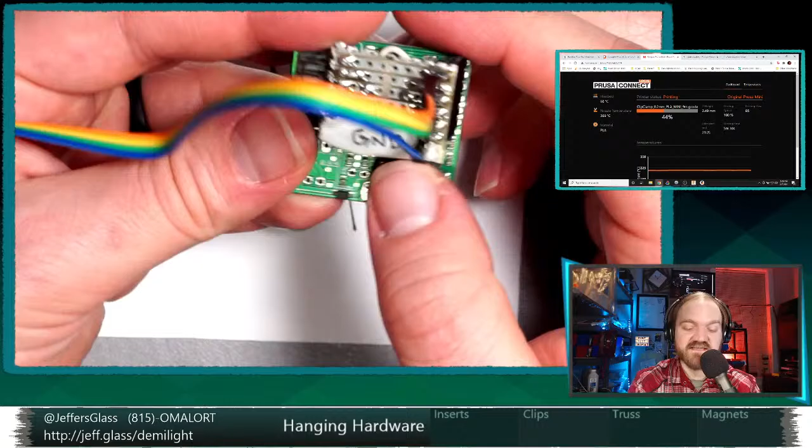I have not put the order in for the 0.96 boards yet, so they probably will not be here by next weekend. Ditto the Pocket RDM controller.

I've just been so... I don't know if I mentioned this earlier, but the transition back to working on site at my job full time really threw me for a loop. Both the different sleep schedule and the work, and also, as y'all know, the effort of being out in the world right now is just a lot. So it really knocked me out for basically all the evenings this week. I've only really been working on Demilight stuff this weekend, so a little bit of lack of progress there, but that's okay.

So, the good signs for 0.95, other than this one simple error where I screwed up the TX/RX - that'll be an easy fix - and 0.96 should be in a pretty good state.

Let's see, what else? Playing a little bit with different, just using up different filament colors to print out various Demilight parts. So like this, I think is maybe my favorite. It's got basically copper down the side and a white body and a blue stripe. It's kind of got like a Speed Racer-y vibe, I think, which I like a lot.

I really like how, because of print orientation, you end up with the different colors on different sort of orientations on the light, right? So this printed with a copper layer down, which means that the yoke has it on the back, but the light has it on both sides, and the lid has it on the bottom. I don't know, it just ends up in a kind of a cool way.

Also, I know it doesn't come across on camera, but this first layer is just silky smooth. It's just so beautiful. I'm just so pleased.

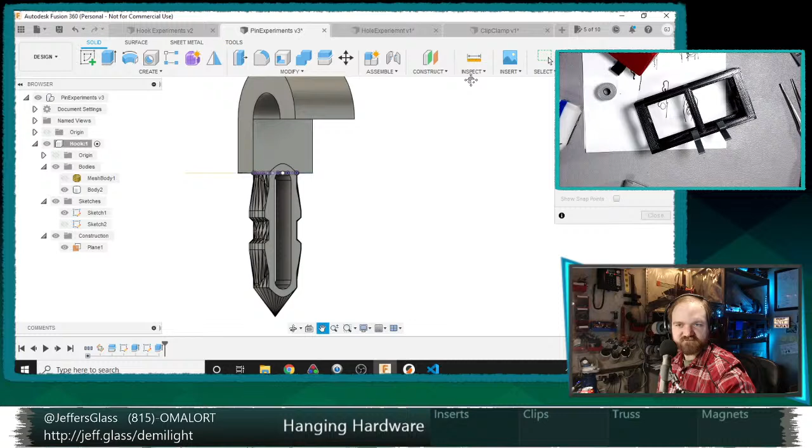I wonder if there's a word for it. So what is the spacing here, going from this point to some point here, in the currently fully ripped off pin design - that is 20 millimeters, almost 22 millimeters.

So where's our demo pin here? As usual, at the end of these streams, I've made a mess of the workbench, right? So basically, if that was going to be the base of our hook, everything on this hook up until that last point is inside the body of our light. And what I was just having a brainwave about is, is there any way... grab an unencumbered body here. There we go, we'll do this fun two-tone one.

To have the hooks shoot up through the corners or somewhere where we might have clearance. Because I don't think we have clearance to... oh, no, that's not true, it's only half of the pin. Highest point on the opening of the clip, right at the center of the pipe on the truss. Highest point.

Oh, I see, Chris. I think also, I think I misspoke a moment ago. So rather than in profile, the pin being here, it's actually here, right? Because only this amount of the pin needs to actually be clipped into a physical body. So it's really only 11 millimeters.

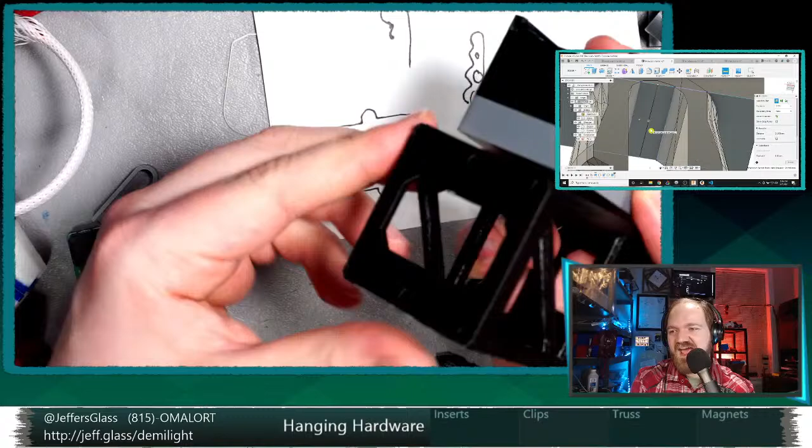44 millimeters center to center. Just eyeballing it. Let me get the silver truss, that'll be easier to see. Just eyeballing the existing Demilight form factor and these truss widths, I fully believe there's a world where that hole exists. Probably it's like exactly, more or less - really could be the motto of these streams, right? Look at how that lines up. Zoom me in there.

Right, those pins basically want to be centered on the existing walls. So it would have a small bump out - a small bump in, which we could tolerate. We have some internal clearances. I think that's very appealing. And it would be sized to fit a 44 millimeter box truss, which is neat, because I like these trusses a lot.

Yeah, I think that's got some possibilities. All right, 0.96. Pins, clips. So, things we learned tonight - let's wrap it up, things we're planning: a pin methodology to secure the hook to the light. Now thinking, I said I was going to wrap it up, and I have a bonus thought. Got to think about how these orient.

I feel like it's this way, so you hang across the truss. I guess I'm literally just stealing this design for now. Maybe I'll iterate on it and find a version where you can do that cruciform - it goes one way or 90 degrees in the hole. Maybe I'll work on that some.

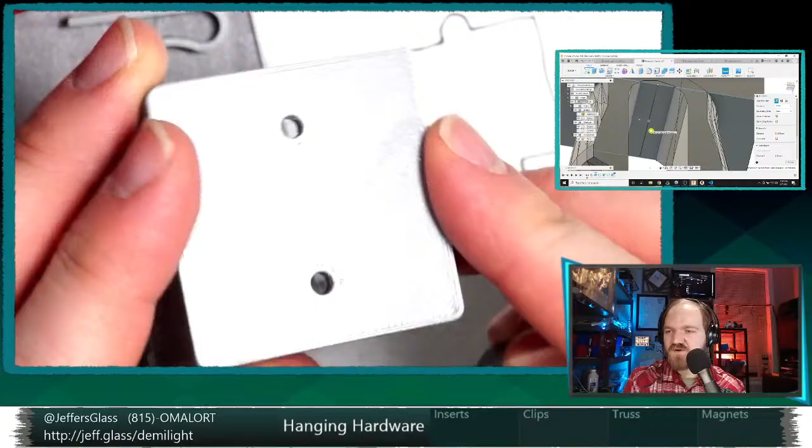And then to integrate that into the Demilight body, I'm going to think about putting a small bump out here so that these pin hooks with their pinchy clips can sit at 44mm centers, and we'll use the D3D truss design as our truss model going forward. That feels pretty good. I think it's also relatively easy to say, okay, if you want to use a different truss, what you need is a 44mm spacing that you make your adapter hook onto.

Thomas says, what if you used holes in the PCB as what the hook's clipped onto? Ooh, I don't hate that. We'd probably need to go... there's not a ton of real estate inside the footprint of the PCB itself right now. We could make something like this the footprint of the PCB as opposed to coming out of the 3D print. But I think, yeah, it's a super neat idea.

If we were going to get really fancy about it, there'd be 2 mounting holes in the PCB that the clips would clip into, and that would also secure the PCB in place. Although then you'd have to have the hooks in place for the PCB to be secure, and I think we want those 2 things to be separate, right? Because often these are going to just want to sit on a desk or on your light board or what have you.

Yeah, it's a neat idea. Thomas, tell me more about the image that's in your brain, because I'm curious. Just thinking about how that would work, and certainly we can do a custom PCB shape, right? That costs no extra to do an external bump out.